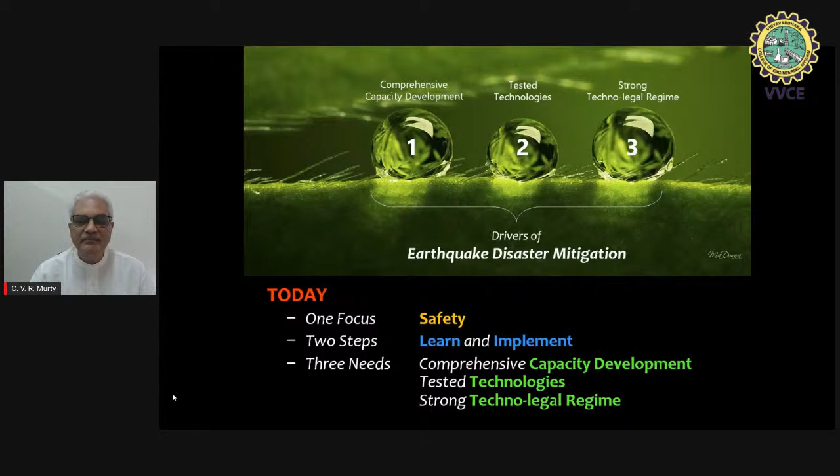So let's begin with the basics. We have a lot of activities before the event, and suddenly there is an event, and then we have a lot of activities after the event.

Clearly, before the event, normal expectation is that we can prevent the disaster. But earthquake is one disaster where prevention is rarely used as a word, and if used, it's in a very limited context - not to stop the earthquake, but to reduce the disaster. The key effort will be mitigation, which is making the built environment capable of resisting the strong earthquake shaking that is expected.

Preparedness is bringing people together and making them ready to face the eventuality of a strong earthquake shaking. But once the event has happened, after that we will need to do response. We will have to rehabilitate the people and also do some reconstruction for the lost built environment.

In this entire disaster management cycle, our focus is actually mitigation and preparedness. These two will require 80% of our effort. If we haven't put that in, it will swap with response, and we will have to do 80% response - but unfortunately we would have lost lives and a lot of property.

But if you want to reduce the post-earthquake effort, these are the two items we need to focus on, especially for earthquake disaster management.

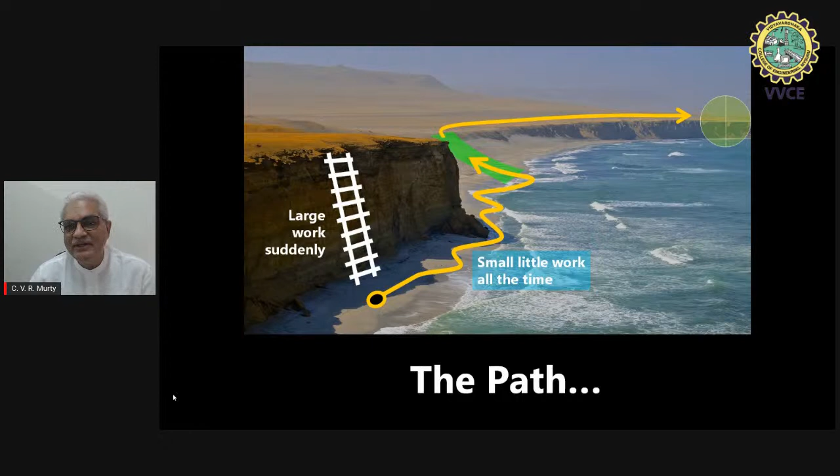In the second path, we notice we have to do small little work all the time without any rest. This is the entire picture I want to share: if you do response, rehabilitation, and reconstruction, you are putting ladders and reaching not the destination, but somewhere far away from it. So we haven't solved the problem if we just do response, rehabilitation, reconstruction.

If you do mitigation and preparedness, that is the only sustainable path for us to reach a state of being prepared to face earthquakes. This clarifies the disaster management cycle and the importance of these two elements, mitigation and preparedness.

We could have done a large amount of mitigation and preparedness and kept the earthquake disaster effect very local. But if we don't do our hard work, it will spread as a disaster of the state, of the nation, or even sometimes internationally.

What is very clear is that if we don't do any mitigation, then the game is over, and we are actually inviting a level 3 trouble for all of us, where we may even need international support. This is not the intent of disaster management in this country. We would like to ensure that an event in a local scenario does not become an international matter.

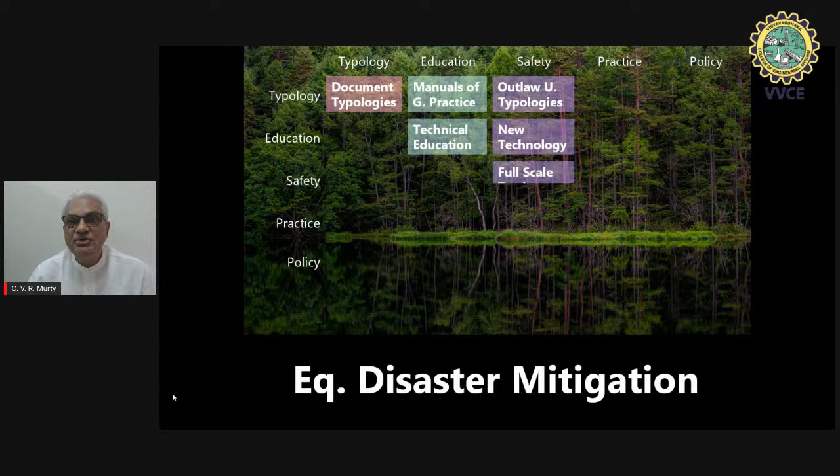We need to come up with new technologies and do full-scale testing, because earthquake is a nonlinear problem, so we can't do scale model testing. We need to develop skills in the artisans, do continuing education of professional engineers, undertake retrofit, and develop standards.

And finally, we need to change bylaws, license engineers, do peer review of all the structural safety designs submitted to municipal offices, assess risk regularly, and show that index to the people on the level of preparedness we are in, and eventually regulate all of it through a Structural Safety Act.

Now let's divide this work into the three groups we've identified, the trident, and that will be the division of primary responsibility. Even though each of the three groups will participate in all the elements, the primary responsibility lies here. The industry will take the safety and practice part, which is to do with the skills and implementation of skills and practice.

Government will take the policy part, which is to do with the attitude of the people. And academia will take the education and the typology and inventory part, which is to do with knowledge. So knowledge, skills, and attitude together are going to make this country a competent nation.

You can understand that in mitigation, it's not just one of these items. If you do only one, you haven't done enough. You have to do all of these items, and there is no sequence. You have to start off on all of them, and eventually it will improve.

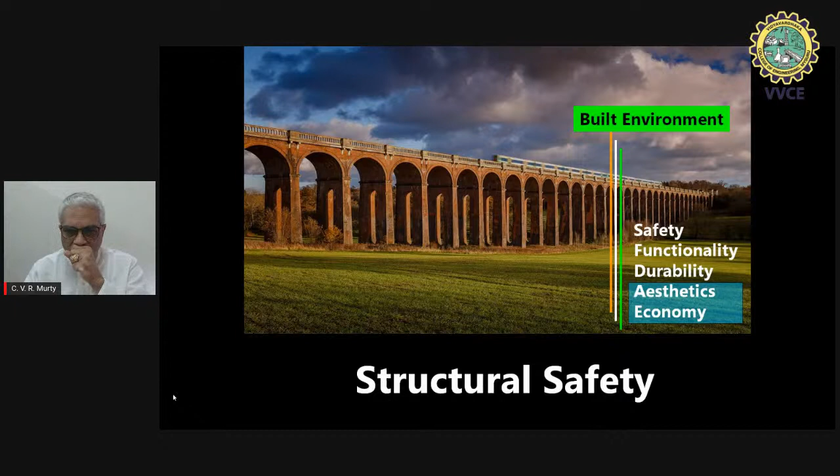So it's best to go on wisdom, and wisdom tells us many things. First, it says don't make known mistakes. So what are the items we have to make sure of? We need to make sure that the people, the manpower, is competent.

Second, the land use has to be based on past experiences and the projected risk at different places. For example, when a river is going to go into full spate and flood, why would you build in low-lying areas?

We need to pick materials carefully. It's very exciting today to use high-strength materials, but they are the most dangerous materials to use because they are engineered materials, and they are brittle. We don't do any experiments, and we go ahead using them without standards even permitting their use. So jumping the gun by the industry is not doing good to this nation, as we are conducting ourselves today.

Second, a large number of untested technologies are borrowed from international environments. They may be applicable to non-seismic countries but are being grafted into this country. This is another area we have to be extremely careful and wary about, simply borrowing technology from international environments. Compliance - I think we need a mechanism for ensuring compliance with the basic safety standards laid down in this country, whether they are being adopted or not.

So you would say, such a big task, how would you go about it?

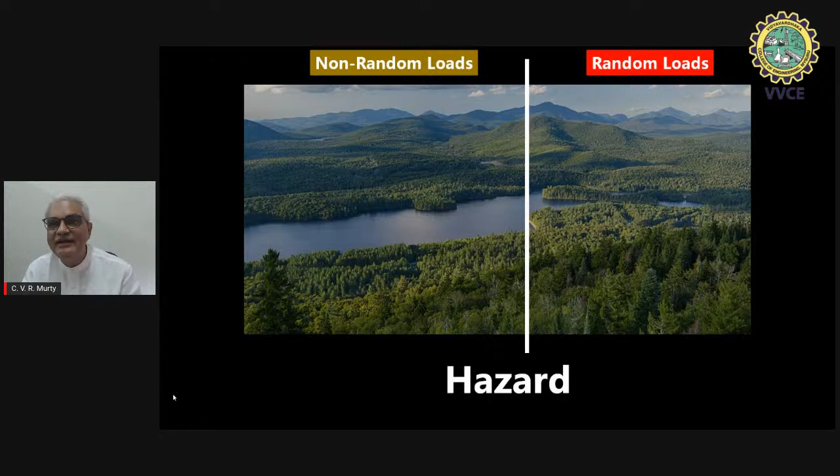If you look at hazard, we will take all the loads into random and non-random loads. I hope you know the list of random and non-random loads. On the left-hand side are the classical loads: dead, live, snow, and so on. On the right-hand side we have wind, blast, and earthquake.

The ones in green are displacement loading, or strain loading, and this is not taught in colleges, how to do structural analysis for this. In the normal context, it's not taught. Especially earthquake safety and earthquake analysis is something one learns by oneself without any formal support. And if you keep this as an elective for too long, people will have the illusion that they know the subject.

Now, when you look at these non-random loads, they follow a certain normal distribution. But when you look at the random loads, they follow a Poisson distribution. On the left-hand side, we say we want 95% of the cases where the load has to be less than this value, this is what we call characteristic load. On the right-hand side, we need to know what probability of exceedance should we take for that load level to be acceptable.

But as of today, in the standards, we call them design loads. They are considered values, but not characteristic values, because we have not clearly stated our agenda. Are we saying 95% of the cases? Then, are we taking the corresponding statistical analysis? This is where we need a lot of introspection and to relook at the way we are defining our loads.

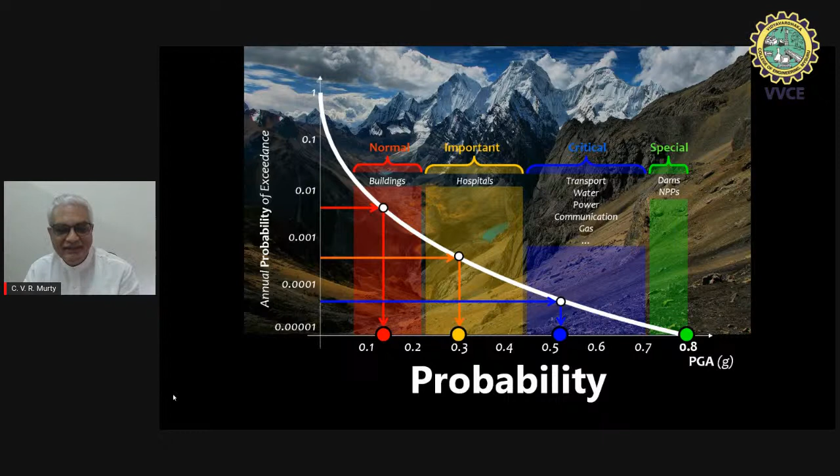Now, in this scenario, these are the numbers which are conceptually in place. But have we done such rigorous work? The answer is no, we haven't done this seriously to set exact values of probability for each of these items. That effort is to be done, and we need to do it urgently.

Another important aspect missed out in today's earthquake hazard assessment is that if you look at the Indian plate colliding with the Eurasian plate, there are plate boundaries at Andaman Nicobar, and some interplate boundary proximity in Kutch, Gujarat. But we are faced with our Himalayan arc, which has a special feature: during an earthquake, the plate moves out and comes back, a movement that is not straight but an opening and closing movement.

The impact of this in the fault parallel direction is shown as a pulse effect in the accelerogram, and in the perpendicular direction another pulse effect. In the velocity diagram, velocities up to 2 meters per second are already recorded in past earthquakes. Accelerations up to 3.2 G are recorded. Slips up to 700-800 mm, even 1 meter, are recorded at instrument locations. If you go onto the fault rupture zone itself, the numbers can go much higher, up to 3, 5, or 10 meters.

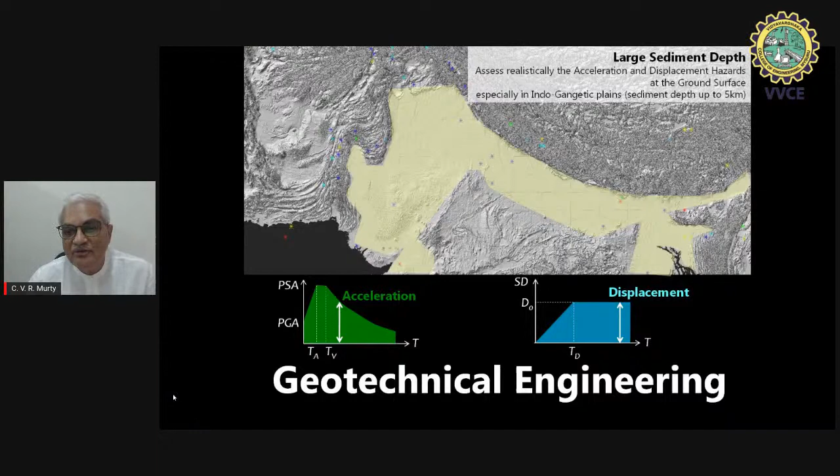We need a lot more organized hard work, because as the Indian plate collides with the Himalayas, the lesser, middle, and higher Himalayas are formed. As you go from Jabalpur to Kanpur to Lucknow to Gorakhpur and up to the hills, the depth of sediment varies from 0 to about 7-8 kilometers or even higher. In that scenario, the natural period of the site will go from half a second to about 7 seconds in the Himalayan wedge. Different structures with different natural periods will be picked up by the earthquake shaking, and we will see serious damage inflicted on them.

So clearly, we need regulations that are sensitive to the site effects likely at different locations, at river mouths in India, or lake beds that we are building on, and so on. We need to be very careful about land use development in the time ahead.

The word multi-hazard has come on suddenly, and it looks like a new monster. Answer is no, it's not a new monster. We've always been doing multi-hazard, just that it's fashionable to say it today. We have been handling wind, waves, earthquakes all together in the past. But somehow we never made noise about it.

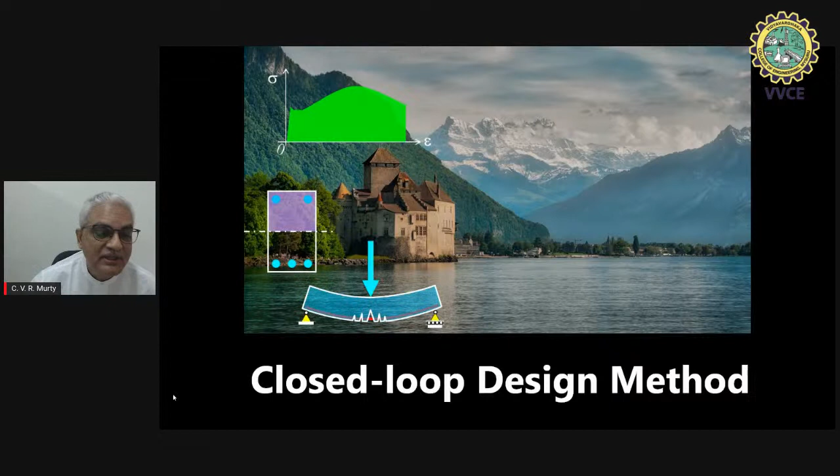This is B.Tech and M.Tech. And then you go to construction, you do detailing, and then you construct the structure. But what is actually required is that you need to know what structure you have designed, how it will behave, and what will be the damage that will be inflicted in it. So currently, in today's education process, we are only doing the forward loop, and we have not done the backward loop. Unless we do the backward loop, we don't know if the design that we have given to the people is safe or not. And this is where we need to give a holistic view to our students and teachers.

They need to understand that earthquake is not a force, it's a displacement, and we need to ensure that there's enough deformation capacity in the structure to resist the displacement that is imposed, and that earthquake doesn't apply forces. Forces are induced because of inertia. All this has to happen calmly, and it will take time. And there has to be priority to teach earthquake safety to the people of India.

There are 7 virtues of earthquake resistant structures. And if you believe this, the first virtue is that it has to be a simple configuration. Structure has to be simple in geometry and structural system and the use of non-structural elements. The second one is it must have an assured at least minimum stiffness, initial stiffness. It must have at least a minimum amount of lateral strength. It must have at least a reasonable ductility and a guaranteed deformability in the structure. And it should lead to a desirable collapse mechanism.

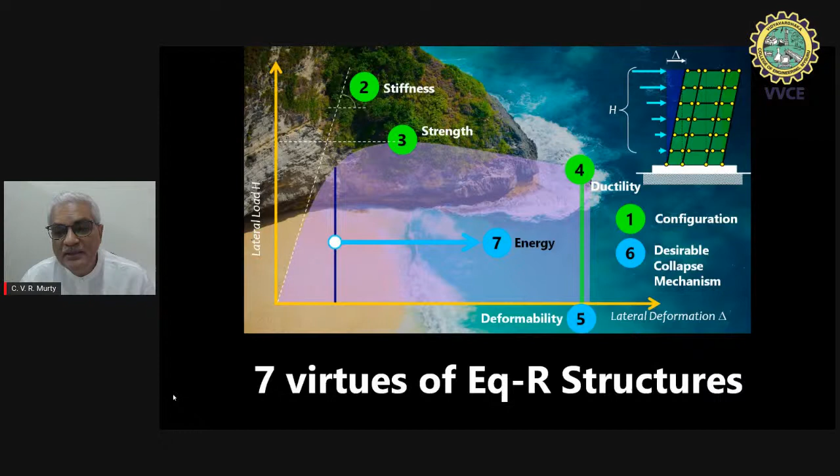But more importantly, we need to ensure that the energy that the earthquake is feeding is absorbed by the structure. And these are the 7 virtues that the structure has to now be capable of in the path of trying to resist earthquakes without collapse.

So what are the design methods? There are 4 levels of design methods. We started with stiffness-based design. We are currently in the strength-based design. We are poised to get deformation-based design in place, and we are a little away from the energy-based design method. The stiffness-based design is discontinued already. Currently in practice is strength-based design. Currently under development, where the focus is on collapse mechanisms and deformability. This is what is the hottest topic right now for research.

In time ahead, we will not only worry about collapse mechanisms and deformability, but we'll also talk about energy absorption in structures. We are at level 2 right now. We need to go to level 3 and level 4. Hopefully this will mean a lot of hard work for all of us, which we will do happily.

Let's understand vulnerability a little bit. Vulnerability is the incapability of the built environment to resist earthquake shaking. Let's take 3 examples: wind, flood, and earthquake, and 3 structures. In wind, a flood, and an earthquake, what happens? In the first, the wind is going to suck the structural components away up into the sky. In flood, it is going to topple the structure, and in earthquake, it's going to bring it down vertically.

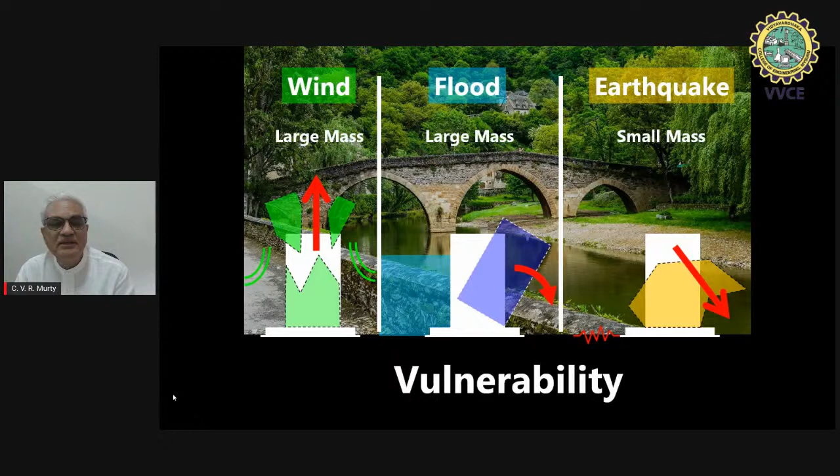Now, how does a designer do all of this? In the same location where there is wind and earthquake, how does a designer say what is large enough mass for wind, but small enough for earthquake? This is the magic that R&D has to solve. What is the optimal mass? What is the optimal design? What is the best design that can resist both of them?

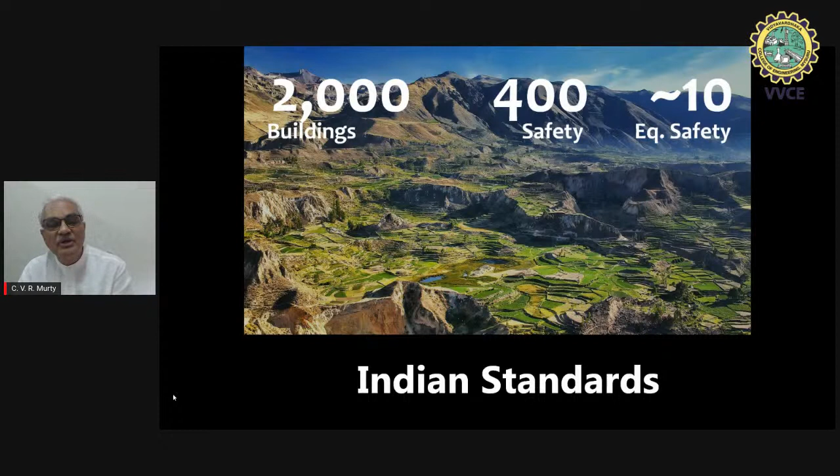In Indian standards, the picture is very clear. We have about 2,000 standards for buildings alone, and 400 are related to safety, and only about 10 of them are related to earthquake safety. In this 400, almost all items come into picture, but in the safety list, the 3 focus elements are estimating hazard and analysis, design and detailing, and assessment and retrofitting. This is where the 3 standards are focusing right now. But even there, it's largely related to buildings, and the other non-building structures, we need to develop those components.

A new habit has to begin, that draft standards are prepared by practicing professionals and proactively brought to the Bureau of Indian Standards, so that these clauses can be included based on the considerations they are experiencing during practice. Of course, we need to increase the number of academics and professionals engaged in the development of standards.

So what is the status today on the same 3 elements of nature? Wind is seasonal, flood is annual, earthquake is rare. So how are we behaving? We are addressing wind to some extent, but flood we are disrespecting - we are constructing in low-lying areas. And earthquake, we are not fearing, and we go on despite past experiences.

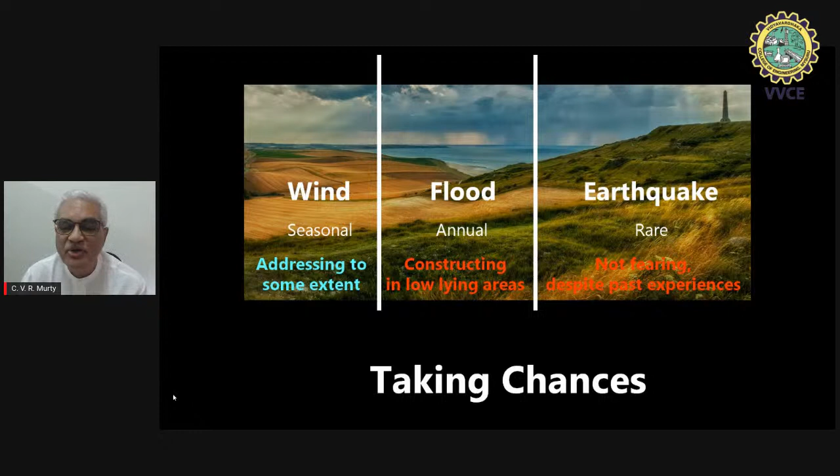In 2001, we lost 13,805 people, and we lost a huge amount of infrastructure and heritage property. But have we really taken action forward from 2001 onwards? So what are the gap areas?

When you look at earthquake safety versus wind: in wind, the behavior is supposed to be elastic, fair enough. But in earthquake, the behavior is supposed to be inelastic. The force loading of wind has an upper limit that can be determined deterministically, and there is sufficient data for that - you can go with a value and be happy about it. But when it comes to earthquake, the loading is displacement, and this upper limit is not determinable deterministically. We have to go probabilistically, and we have insufficient data even to do a probabilistic estimate. So we are in trouble. We have a shortage of knowledge here.

As you can see, nonlinear behavior of the structure during earthquakes is not taught - nonlinear analysis is not taught in colleges as mandatory curriculum. So how do you expect engineers to know nonlinear analysis? They will take the computer software, press any button, and be happy about it, and make others happy about it too. Very good. But what is the truth? Only time will tell.

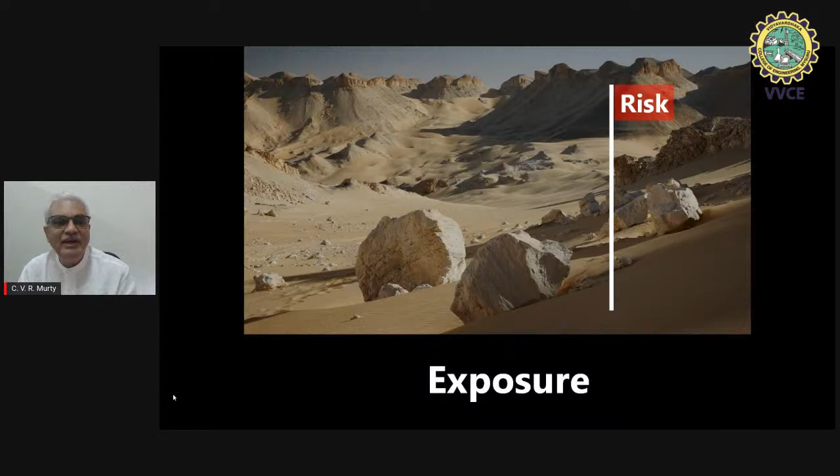Exposure. If you want to see the risk assessment, there is a strong need to understand how much exposure we are providing to the earthquake, of the people, property, downtime, and business continuity. For example, in this picture, in the middle of the desert, if you have an earthquake, no sweat, there is no exposure, zero. But if you add buildings and structures here, then you're putting people, property, you're worried about downtime and business continuity. And according to this, there'll be human risk, property risk, financial risk, and business risk.

And the way to control all of this is bylaws. So bylaws should be written a lot more carefully with a holistic picture in mind as to how much risk we are putting our people into, right? Because exposure is one of the important components of risk. And if you indiscriminately keep increasing FSI in buildings and structures, you can actually harm people's lives by unduly putting a large amount of people in structures that are actually vulnerable to earthquake shaking.

So talking about risk, the three components of risk are hazard, vulnerability, and exposure. Hazard is controlled by science, vulnerability is controlled by structural engineering and geotechnical engineering, and exposure is controlled by bylaws. This together is our game of earthquake risk, and we need to be very, very careful.

So today's situation is that under the probable likely events, the shaking, the impact has been such that we are seeing extreme risk under intensity 7 shaking. 220 kilometers away in Ahmedabad, when the 2001 earthquake came, intensity of shaking was 7, but we had 132 multi-story buildings collapse. That's not the scenario we want.

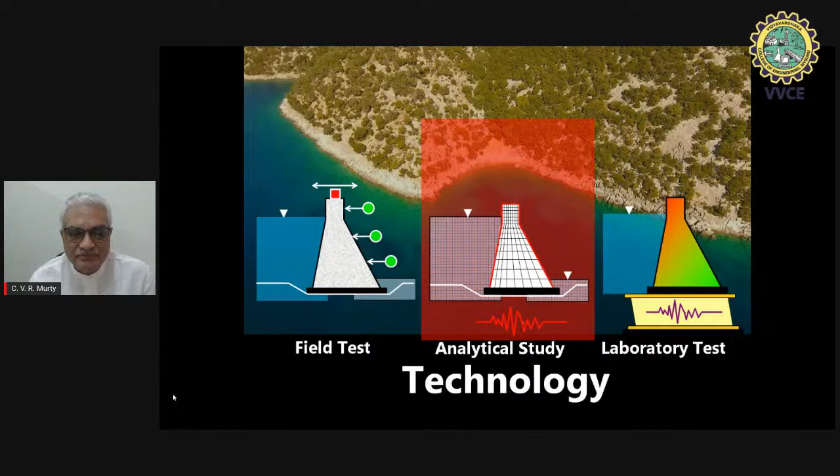Now, if I take just the analytical part alone, we are doing the equivalent static method, but there is response spectrum method, pseudo-dynamic method, and dynamic method. We're not doing the right-hand side three items. We're only doing the equivalent static method, which is a 1960s item, right? There are 3,500 major dams in the country, and if you're still striking 2 stones to assess their safety, I think we are not doing justice to the people of India.

We need to buck up and make sure we implement the correct level of technology when each of these tasks are given. This is one example I'm giving you of dams, but there are many other examples that we can dwell on and understand the current status.

Coming to retrofit, we need to have very committed individuals who can actually say, I want to do retrofit, and they keep pushing different groups and organizations, including governmental structures, where retrofit has to be done. Very nice. But more importantly, we need to make sure that while safe new structures are going to increase, we have to make sure that the unsafety in existing structures has to be reduced, and this can happen only through retrofitting.

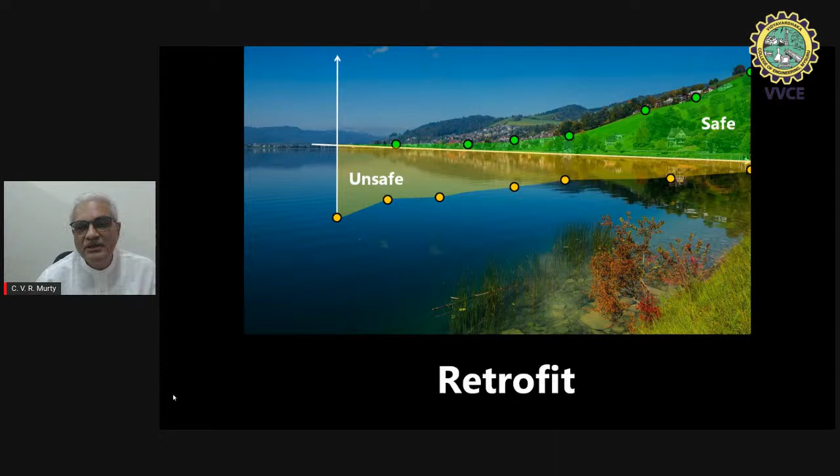And retrofitting is a slow process, a tedious process. It's not going to be as fast as making newer structures safe, but it requires a higher level of engineering, and we need technologies for retrofitting.

As of now, there are a lot of people who say that if you can do component-level retrofit, you will be able to save the structure by either jacketing or wrapping and so on. But the key issue is the holistic parameters, like the lateral stiffness of the whole structure, lateral strength of the whole structure, lateral deformability of the whole structure. These are the questions we have to answer, and simply wrapping one column will not alter any of the global parameters of the structure.

So there's a large inventory of critical structures, lifeline structures, schools, and houses that we need to retrofit, and we don't have hands for that across the country. So we need a lot more energy to come up on that.

To assess existing structures, we need methods, and we have 4 levels: rapid qualitative, detailed qualitative, simple quantitative, and detailed quantitative. There is an illusion that the first level assesses safety. No, it's not—it's only to screen. Safety is assessed only by quantitative methods, which are level 3 and level 4. Level 1 and 2 only give you screening procedures. They don't tell you whether the structure is safe or not. They only say that prima facie it doesn't have the required features.

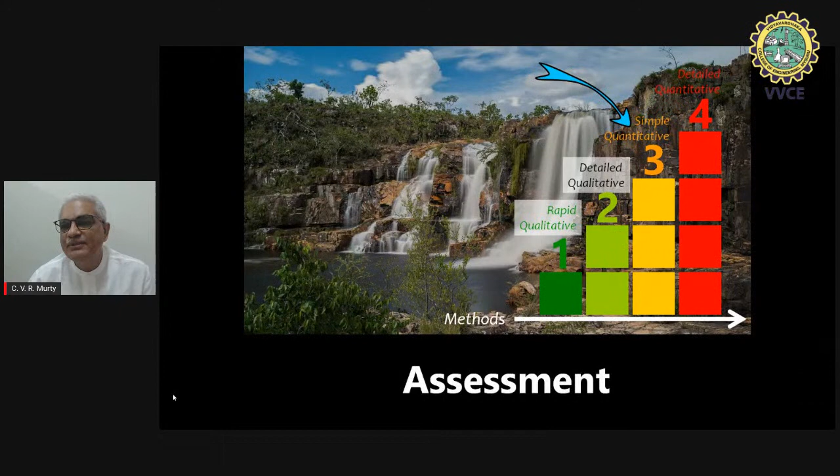The level of unsafety can be assured only through quantitative measures. I would urge that we start at level 3 urgently to get people to understand what retrofitting is. What's important is that the rigor required for level 1 is lesser, level 2 is a bit more, level 3 is further, and level 4 is even higher. More importantly, the time taken for levels 1, 2, 3 and 4 are very different—level 4 requires a large amount of time. So when you do level 1 through 4, there has to be a strategy.

The strategy is: if you take 1,000 buildings at level 1, 100 of them will be taken to level 2, saying they need to be retrofitted. Out of that, 10 will be taken to level 3, saying they need to be retrofitted. And out of that, 1 will be taken for retrofit at level 4.

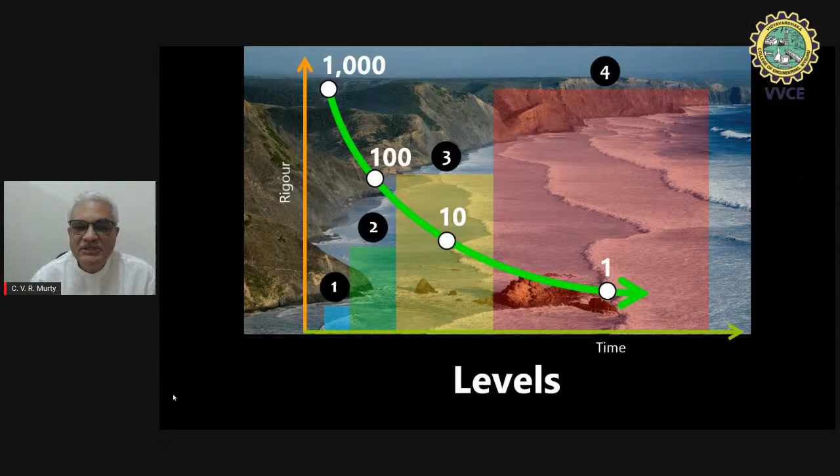If you look at the 33 crore houses we have in the country, 80% are sitting in seismic areas, which is like 25 crores. If you start doing work on them, even if you take just 1% of that, that means 25 lakh houses. Obviously, 25 lakh will become 2.5 lakh, will become 25,000, will become 2,500. To fix 2,500 structures, do we have enough people in India? That is the question we need to answer urgently, so that the work of earthquake retrofitting can begin.

You should understand that there is retrofitting, rehabilitation, and repair. In retrofitting, structural capacity is being altered. In rehabilitation, functional use is being altered. And in repair, visual improvement is being altered. Structural capacity can be restored to original condition, upgraded to a higher level, or the structure can even be remodeled. But one lesson learned very clearly is: repair is not retrofit.

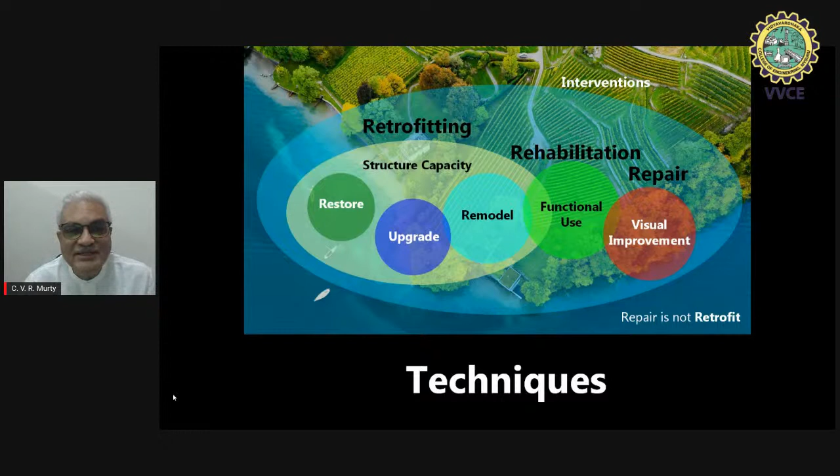So anybody who is selling repair in the name of retrofit, you better be careful. This is another market that has grown aggressively, and for want of people who understand the subject, they are getting away with anything they are selling. The process of retrofit is simple—there are set procedures for that, and it's hard work. The process is simple, but hard work it is. That's all. So the bottom line for new structures is clear.

If you want to reduce earthquake disasters, new structures should have peer review of their designs, and technologies should be proposed with R&D backing. Type designs should be done only if they are fully tested on full-scale structures. In fact, we have only 2 facilities in the country today that can do full-scale testing of 3-story houses or even a 15-meter long bridge. We don't have more than that. So for 132 crore people, 2 facilities is too small.

Another issue for us is existing structures—we need to assess them. We need nonlinear analysis skills. We need to learn strengthening and the retrofit measures that have to be undertaken. And we have to start with pilot projects—we can't go whole hog. You have to nibble the mountain, not gobble the mountain.

And bottom line, to do all of this requires competent engineers. We need to make sound appointments, and we need to train graduate engineers, continuing education, but bottom line is licensing of engineers. If engineers don't pass an exam regularly—every 2 years, 3 years, 5 years, whatever—then you're saying we don't have safe hands.

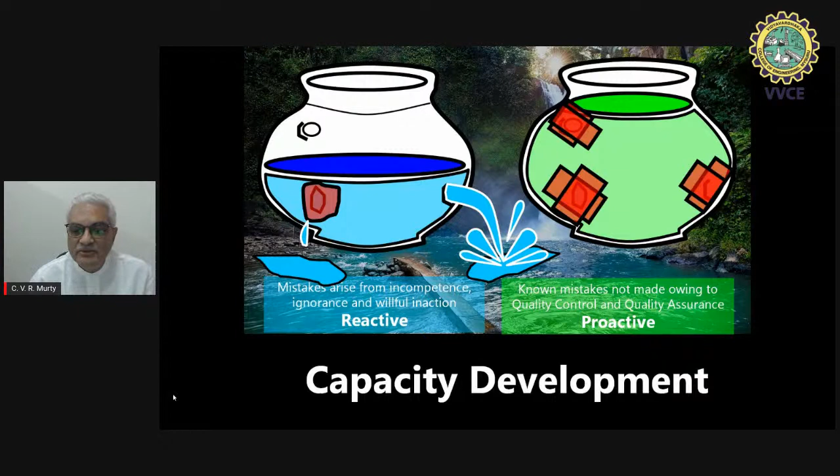So, licensing of engineers: if India has to become robust and capable of doing earthquake resilient constructions, then we need teachers and structural designers who understand the subject completely. We need not just degree holders. Degree holders will write examinations and get a license if they pass, and after every 3 years or so, we need to have that agenda. Otherwise, we will not be able to guarantee safety.

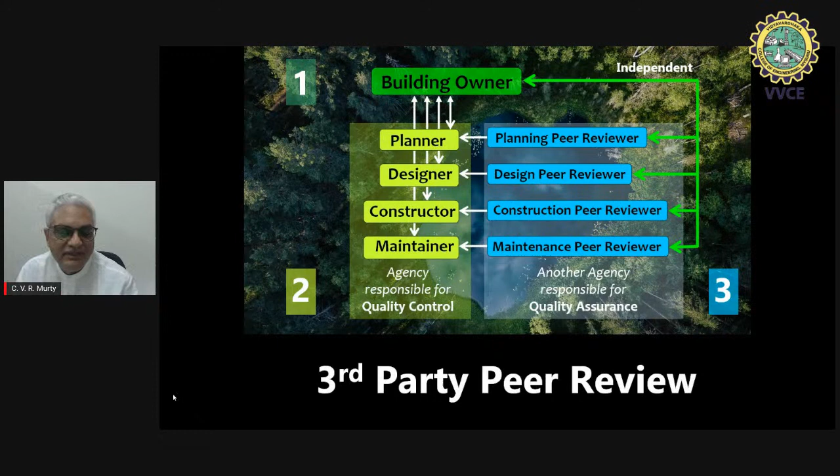So we need another independent group called the quality assurance group. This group will report directly to the building owner, and that is where the game begins. It's an independent group, and they will feed back to the owner what the truth is. So the owner becomes the first party, quality control becomes the second party, and quality assurance is the third party. That's why we need third-party peer review of all structural designs when it comes to earthquake safety.

So we make a lot of mistakes in life. Yes, let's understand our mistakes. I want to do something - do I know what has to be done? Answer is yes. Then am I trying to follow that? Answer is no - that's the error of intention I'm getting into; I know what has to be done, but I'm not doing it. If I know what I'm trying to do, then am I succeeding? If the answer is no, then that is error of execution. If I am succeeding, then it's successful completion of the task. Very nice.

Let's go to the other side. Do I know what has to be done? No. Do I recognize that I don't know? If I don't recognize it, that's error of concept. If I recognize that I don't know, am I trying to do something about it? If I'm not, that's error of intention. And if I am doing something about it, am I succeeding? If it's no, then I have to go back and recognize that I don't know what I'm doing. If I'm succeeding, I move to the positive side.

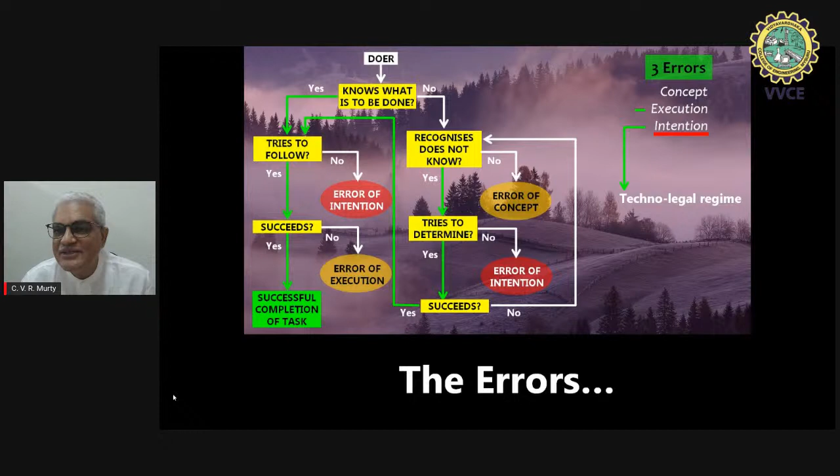Error of intention is the most dangerous of all. You will not come out of it in a court of law if you are shown to have error of intention. This can be corrected only through a techno-legal regime. Error of execution can be corrected through licensing of engineers, and error of concept can be corrected through capacity development.

And that is where we stand today, that if India has to become robust, we need these three ingredients of earthquake disaster mitigation, these three bottom lines of earthquake disaster mitigation.

Complacence is coming into us in many cases, that we know everything and are doing everything right, and that is because we are hurting in attitude. We don't have positive attitude, we have negative attitude, and that is where we are actually getting into trouble. If we can correct our attitude to become positive, only then will we be a competent nation.

You can have any amount of skill and knowledge, but if your attitude is negative, then you are not competent. You are incompetent, even though you have skills and knowledge. The nation is not getting the best out of you, not benefiting from your knowledge or skill, because your attitude is not proactive and positive for the good of others. So very clearly, we need to ask for competence: attitude positive, skill, knowledge, and then only you'll be able to get to competence.

Now all of this will begin with the teachers, and the teachers are at 5 levels. I talked about competence being in 5 cycles from childhood to retirement. The first set of teachers are parents. Second is school. Third is college. Fourth is employment. And fifth is yourself.

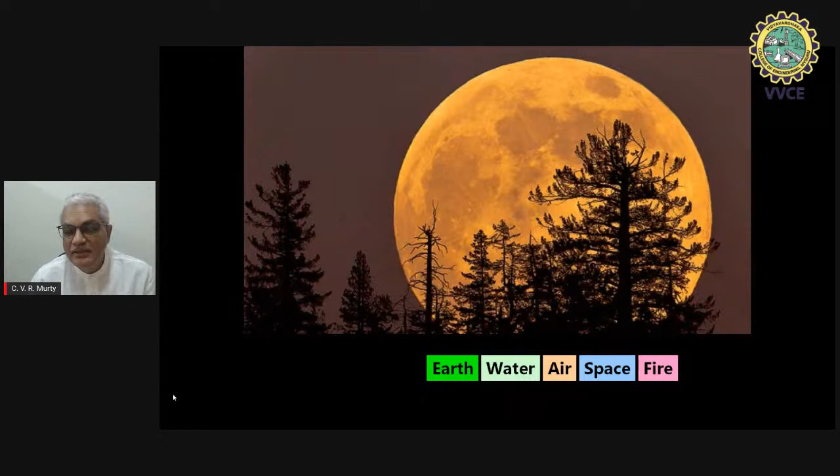Very clearly, nature is going to throw 5 salvos at us, and nature is also watching us. But what is interesting is that we have become paper tigers. By doing paperwork, we don't make structures safe. We need to get the big picture right of the demand as well as the capacity. Only when you get the demand on the structure and the capacity of the structure in place, can you make meaningful contribution to earthquake disaster mitigation.

In the next 30 years, India is going to grow. If we don't change our strategies, we will be 180 crore people from 132 today. But if we are very active, we can become 200 crores. If super active, we can become 250 crores. These are the projected limits of the potential population growth.

So we need to be very careful that the built environment required for so many people has to be created. At least the additional built environment we create has to be made disaster resilient, earthquake resilient. That is where the challenge is - this explosion of infrastructure development and housing is happening. But if we don't correct the method now, we will have more unsafe structures in front of us.

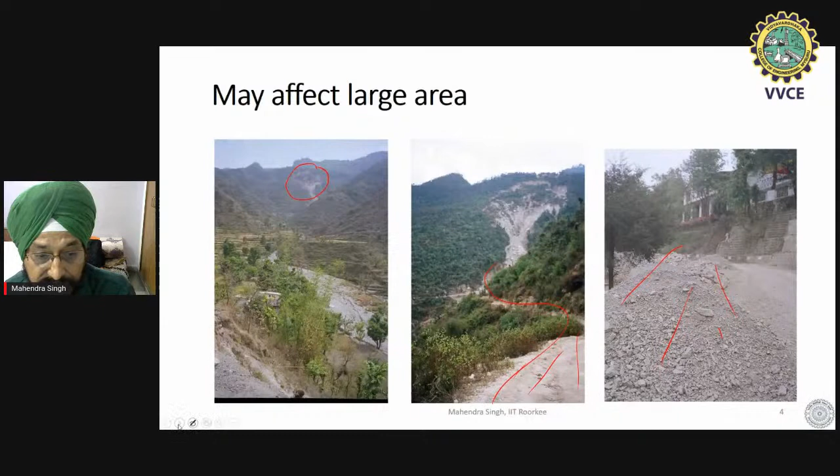I have shown here one of the landslides in our state. You can see it started from here, and you can see how much area it is affecting. This is a very important issue, especially for the hilly regions, and I'm focusing on the rocks.

In geotechnical engineering, failure mechanism is very important - I believe it's important in all branches, all disciplines of civil engineering. When we talk about mechanics, we need inputs from soil mechanics and from rock mechanics. Soil mechanics is very well developed, but as far as rock mechanics is concerned, we are still in a developing stage. Soil can be considered isotropic, homogeneous, and even a continuum.

In general, in many cases, we assume a circular failure surface when talking of slope stability analysis, etc. But when it comes to rocks, they are not so simple. Generally we feel that whenever you get rock, you don't have to worry about it, but it's not so. Rock is very complex in the sense that it has fractures, which we call planes of weakness.

If you look at this photograph, you can see these fractures here, and they make the mass very heterogeneous. I'm using the term discontinuum - it's not a continuum as it is, it becomes a discontinuum, and then the failure mechanism becomes very complex. These are the fracture planes - if you look at this photograph where I'm showing this line, these fracture planes are going to govern the mechanism. The rock mass can slide along these fracture planes, and they govern the failure mechanism. This is one aspect we have to appreciate when dealing with rock.

Let us come to the mechanism of slope failure. Before going to that, I'll be using some terms in my lecture, so let us be familiar with those terms. The first term I'll be using is intact rock. When I say intact rock, I mean the material between the fractures - it is the unfractured block which is between the discontinuities.

Say, for example, if I take this drill core, then this material, this substance, I'm going to call intact rock. This is going to have very high strength, very high modulus of deformation. If I talk about the jointed rock, it will not have that much high strength or modulus values - those values will be quite low. So the first term is intact rock.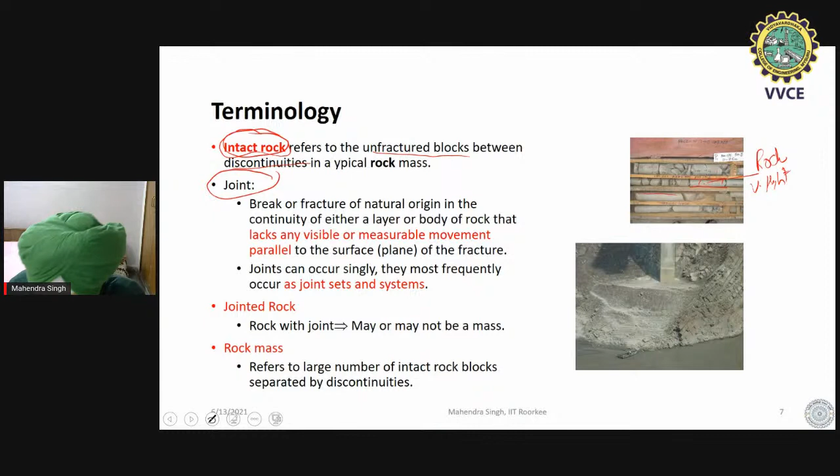The second term which I'll be using is joint. A joint is nothing but a fracture. We commonly use the term joint, though in joint, when you talk about steel structures it's something else, where two members are joined together.

Here it is opposite, where the rock is broken, we call it a joint. In the photograph on the right hand side, you can see a boat, and in the boat one person also, showing the magnitude of these fractures and the blocks. These are intact blocks, and these are the fractures.

The break of the joints are fractures of natural origin, and in the field there may be very small movement along these fractures before you construct a foundation or any structure over there. So this is another term which I am going to use.

The third term is jointed rock. Jointed rock means any rock which has a joint. For example, this particular core is a jointed rock, but it is not mass. So finally, I'm using the term rock mass.

Rock mass means there are a large number of intact rock blocks which are separated by discontinuities. Discontinuity is another term we use commonly for all these breaks in the continuity of the material. It can be a bedding plane, a foliation, or a joint also. So in this photograph, you can see it is a rock mass, and here it is jointed rock. These are the terms we will be using frequently: joint and jointed mass.

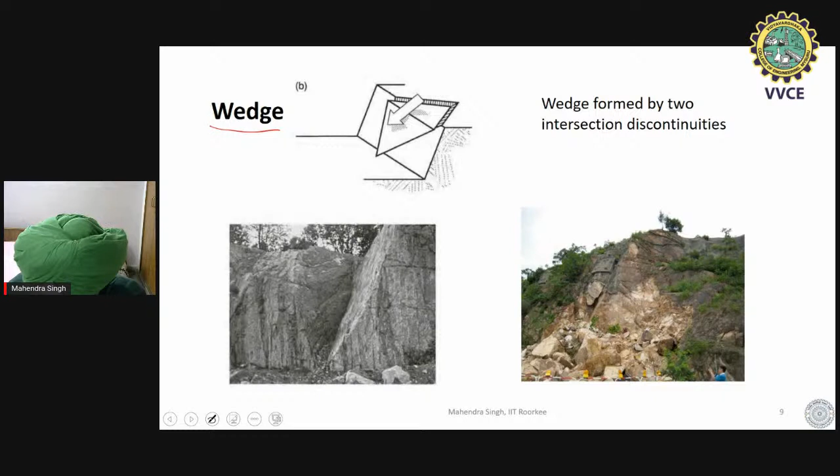Secondly, what can happen is what we call wedge failure. Wedge means now there are two joint planes. One joint plane is like this, another is like this, and as you know from mathematics, when there are two joint planes, they intersect on a line, the line of intersection. So this entire wedge can slide down. In fact, if the angle between these two joint planes becomes 180 degrees, it becomes a planar failure. So planar failure is a special case of wedge failure.

I have shown it in this diagram also. So there's the wedge, and it is trying to slide over these planes. It can be in touch with both planes, or only one plane, with detachment from the other, and so on. This wedge will try to slide down. Here also, the second figure shows some wedges which are trying to slide down. That is the second mode of failure.

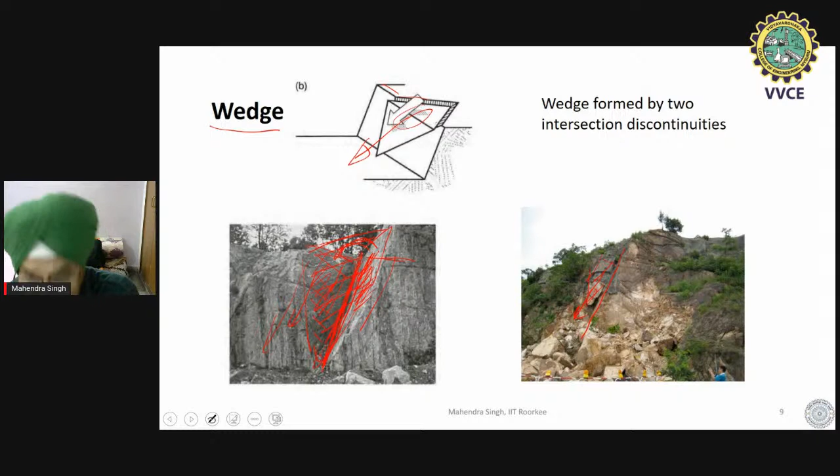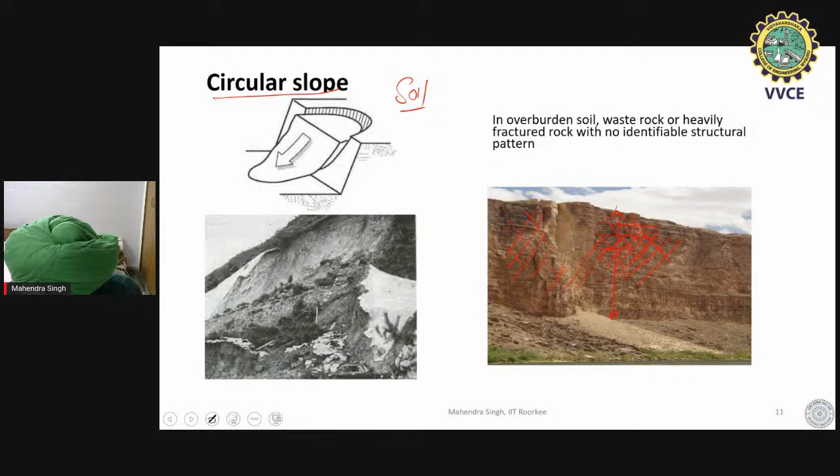Coming to the next one, we call it circular failure. It is the same as you have studied in soil slopes, so I'm not going to talk much about this. What happens is, if there are a very large number of fractures and the spacing is not that large, ultimately it becomes a slope like soil, because it's a very large slope, so scale is also very important. Block size is small, and the fractures, none of them have a dominating behavior, so you can say it is just like soil. We can use soil mechanics theories, and generally we use them for this highly fractured isotropic condition, where we should be able to see isotropic behavior.

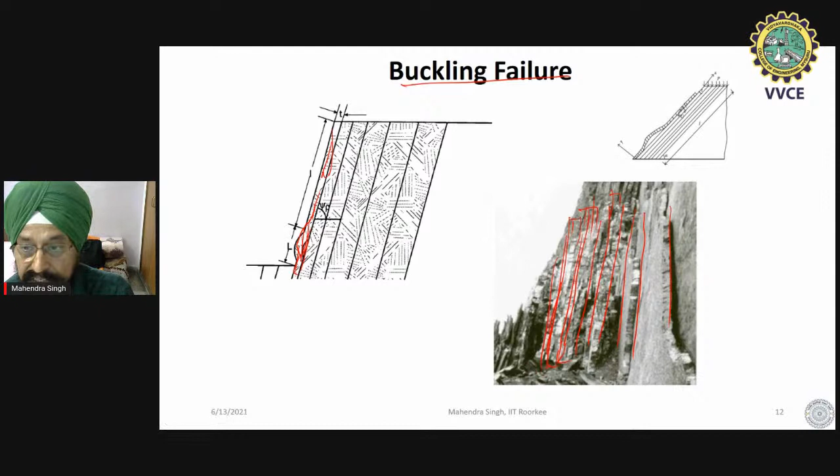One more possibility happens when you have very steeply inclined fractures, and they convert the rock into slender columns. This becomes a problem of mechanics, in the sense that flexural buckling failure can occur. Depending on the weight of this column, it can break depending on its modulus of rigidity, etc. Those theories are already known to you. So this is another possibility when there are steeply inclined joint planes.

Coming to the mechanism now, there are two possibilities, as I told you: sliding possibility and toppling possibility. Flexure I am not touching much here, because it needs the mechanics you have studied in strength of materials like subjects. The mechanics of these phenomena is very simple, it's a simple thing which we have studied.

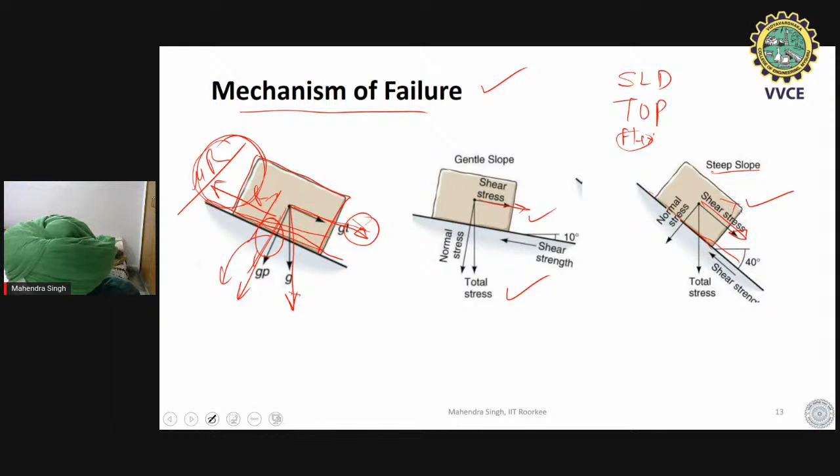So what happens if it is a gentle slope? Then this maximum limiting value of resistance will be quite large as compared to the destabilizing force, and this will be stable. Whereas if it is a steep slope, steep block or steep ground plane, then the shearing tangential forces will be quite large, and it is going to slide. This is the simple mechanics which we will be using with some modifications.

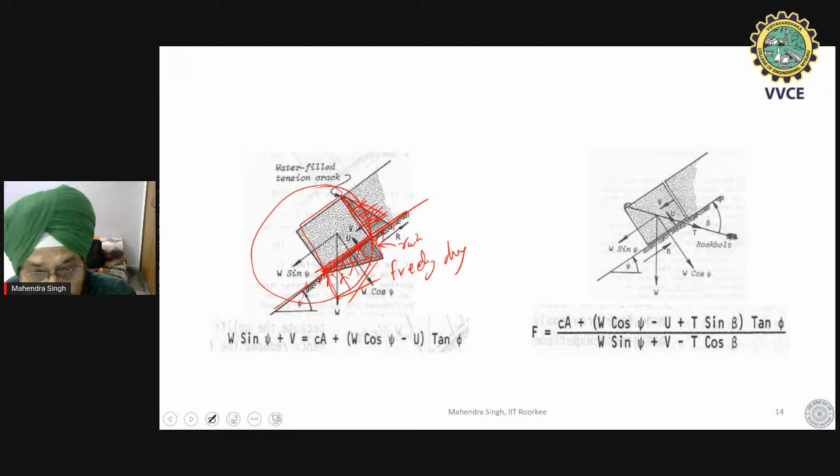So we can consider the equilibrium of this body, and then find out the factor of safety. Basically, factor of safety is how much force is available resisting the sliding, divided by how much force is trying to destabilize it. We can resolve all the forces, the weight in this direction and in this direction, the water pressure acting on this surface, take their components, and then calculate the factor of safety. This is the basic mechanism.

If you have a rock bolt, some tension cable, or you have bolted here, it is reinforced, we can do the mechanical analysis for this force too. T is the force applied by the anchor. I can resolve it into this direction and this direction. It is going to increase the normal reaction, which you add in the numerator in the strength, and the component parallel to the surface is going to decrease. So these kinds of analyses we can do. The mechanics, the mathematics, is very simple.

I was saying that for toppling, we have to consider the geometry. Geometry is very important. So if there is a block kept on an inclined surface, and it is having some dimensions, let us say delta x and y.

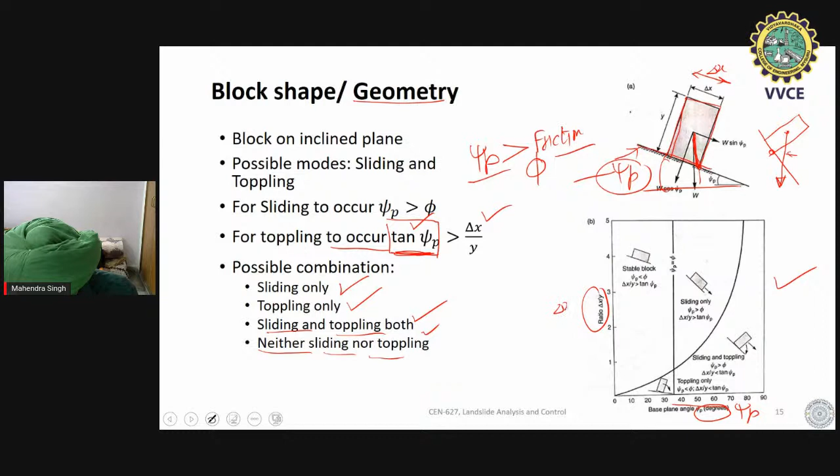And this curve is the tan of this angle. So for a particular case, if tan psi p is more than delta x upon y, toppling is going to occur, and the points will be lying on this side. So this gives us the boundary of the toppling, whether toppling is going to occur or not.

Similarly, if I draw a line here which shows the phi value, let us say phi equal to 35, this gives the boundary. So I can decide, depending on the block size, whether it is a stable block, or there is sliding only, or sliding and toppling, or toppling only. We can work out all these combinations from this simple diagram or mechanics.

Now when I was talking about the angles, when you go to the field, there are joint planes, and we have to have a sort of presentation of these joint angles, in which direction it is dipping. That is one very important thing, direction of dipping, and also what is the angle at which this plane is dipping, the surface is dipping. So angle of plane with horizontal.

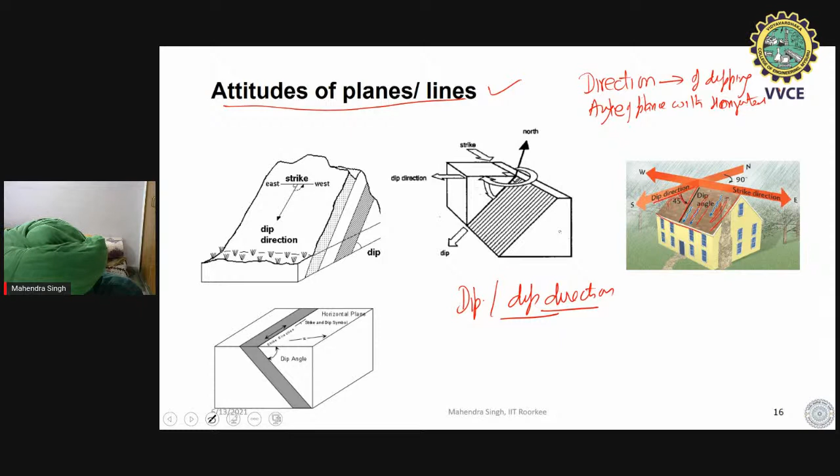So there are a few more terms coming into picture now. I'll be using the terms dip and dip direction. Dip means, I've given an example here, this is the roof, and the angle of this roof with the horizontal is called the dip. So this is the dip.

So in the joint plane, dip is shown here, and dip direction means in which direction it is going, whether towards north, south, east or west, that is called dip direction. Dip direction will be measured in the plan like this, and dip will be measured in a vertical plane like this. These two things are very important, because sliding can take place if both the plane and slope face are going in the same direction or not.

So we use what is called stereographic projection for representing the dip and dip directions. Stereographic projection is used for 3D orientation, with data presented in 2D. So what we do is like your orthographic projection where you have a horizontal plane and vertical plane.

Here we have an imaginary hemisphere, and we assume every plane is passing through the center of this hemisphere. This is the plane passing through the center, and we are talking about the angles only - we are going to plot the angles, not the distances. There are many systems, but we generally use what is called equal area projection.

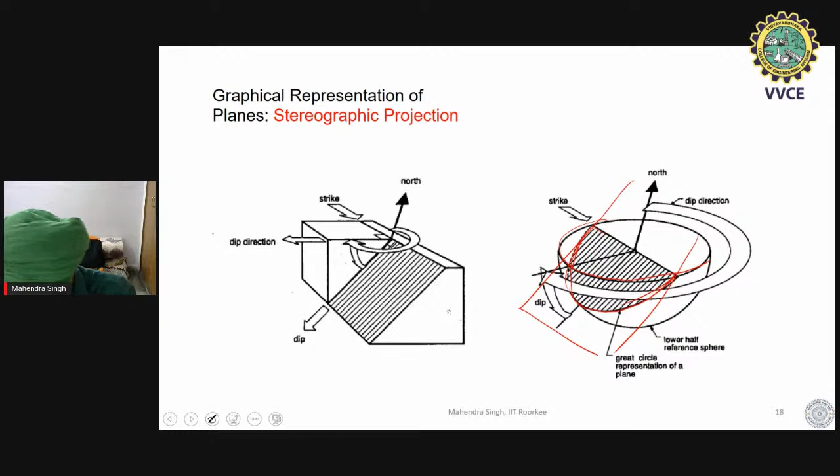So here is the hemisphere, and this is the plane. I take the intersection of the plane with the hemisphere, and then project it on the ground. If there is a point here, we rotate it like this, so every point goes onto the horizontal plane. When I rotate and bring it over, on the horizontal plane you get this kind of projection. So this circle is going to represent the dip and dip direction.

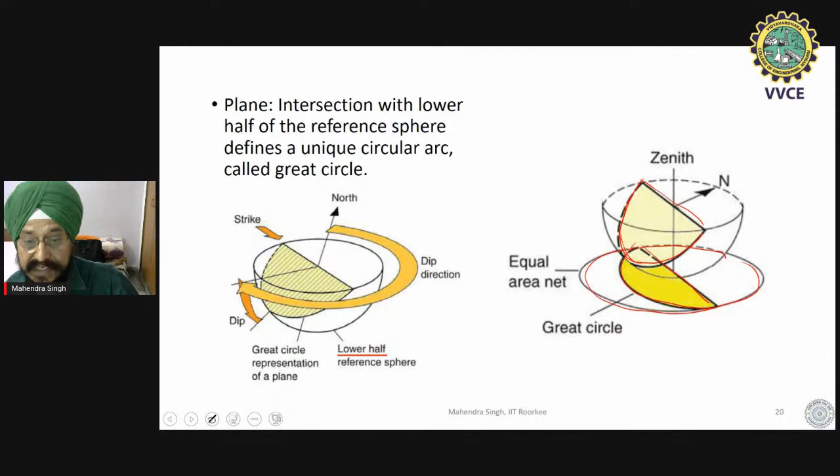So here again I have shown the same thing. This is the intersection, and this circle is projected over the horizontal surface, and this now is going to represent what is called stereographic projection. Finally you are going to have this kind of figure.

So say, for example, this is a plane, and this plane is going in this direction. You can imagine that the plane is having this much angle with the north - that is its dip direction. And this amount here is going to be the angle of the plane with the horizontal - this represents its dip.

Let me try to give you much more feeling about this. What we do is plot these stereographic projections using this equal area net, and I'm trying to run that one. Let me try to have a small video - is it visible?

There is a pin, put it here at the center. This is the way we are going to plot these stereographic projections. Now I click the drawing - it is a sheet, place it over here. Madam, can you respond - is it visible?

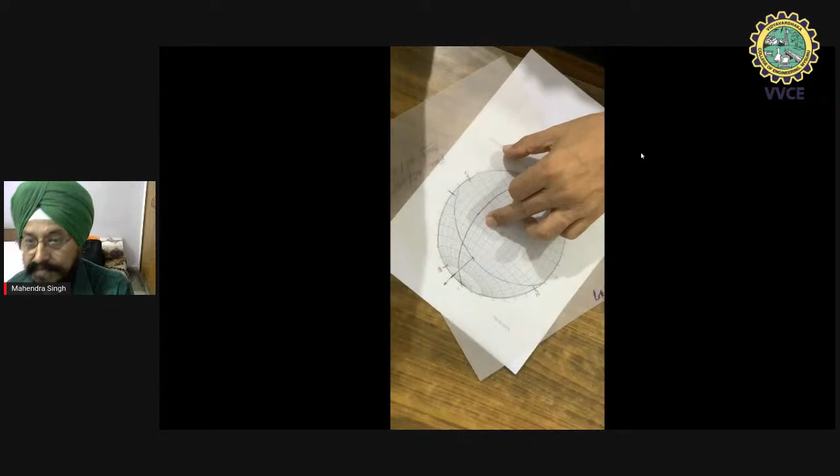So I bring north back to north. This is plane 2, this was plane 1, and here is the line of intersection. You can find out what direction this line of intersection is going - that is called the trend. So this is the trend, and this angle is the plunge.

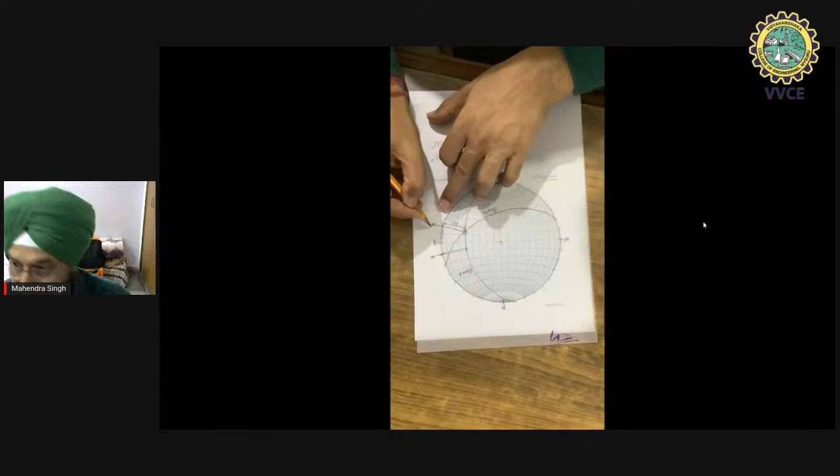So this angle is 10, 20, 30, around 38 degrees - this is the angle at which this line is inclined with horizontal. And I can read now that it is trending at about 106 degrees. Is it visible now? Yes sir, yes sir, it's visible.

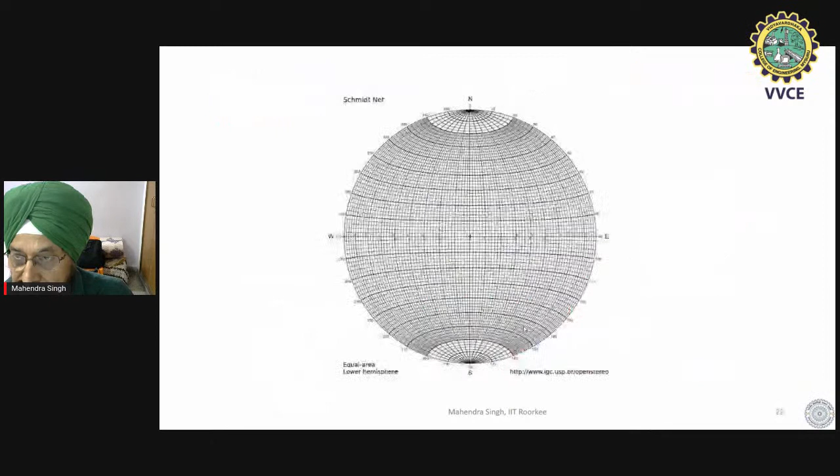So friends, I have shown how we can use this stereo net, and it gives us the idea that if a plane is represented here - this is north, south, east, west - and if you have a diagram like this, that means it is going in this direction from north by this much angle, and this value on a non-linear scale gives the angle this plane makes with the horizontal. So that is what we have discussed.

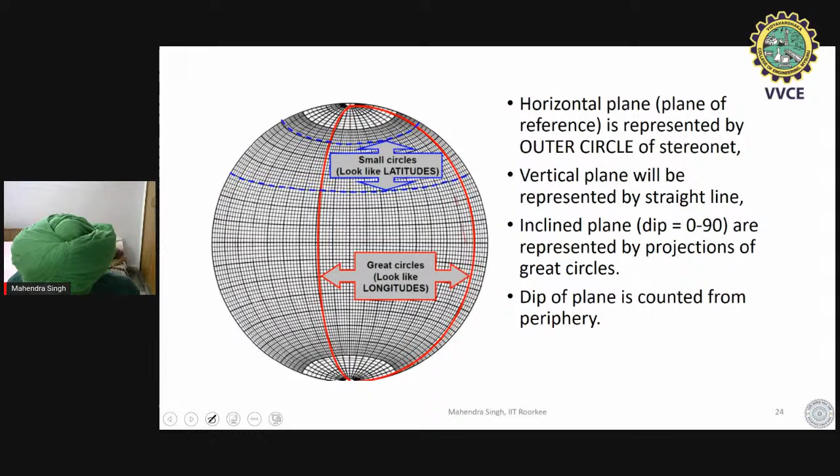I have also shown that if there is another plane here, I can find the intersection. The intersection of two planes is a line, and you can find out in which direction this line is going - it is very important - and what angle this line makes with the horizontal plane. There are great circles, and using these great circles you can plot the stereo net, the stereograph, and then find their point of intersection.

This is the plane, and sometimes we also need the normal to the plane. The normal goes in the exact opposite direction. If the plane is dipping in this direction, the normal will go in this direction, coming somewhere here. This is the angle of the plane with the horizontal, and this is the angle of the pole. Pole means normal, and it will be equal to 90 minus the dip angle of the plane, since the difference has to be 90 minus dip. So you can plot the point, the pole being the normal to the plane.

Now I come to the application part. How do we decide what kind of failure is possible? This is called kinematic analysis. Here I have shown the great circle of a slope face, and I have also shown another circle taken in exactly the same direction, which is the joint plane. So if I look at this, it is something like this: this is the joint plane, and this is the slope face.

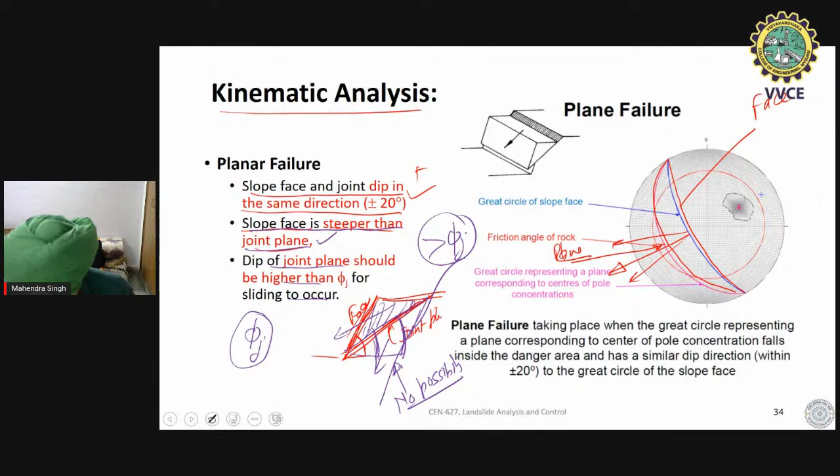The third and very important condition is that if you know the friction angle of the joint plane, phi j, then this angle of the joint plane should be steeper than phi j. If the joint plane is steeper than phi j, then there will be a possibility of sliding. Sliding is going to occur, it acts like a body. So this is the condition for sliding to occur, and this is how we decide based on kinematic analysis.

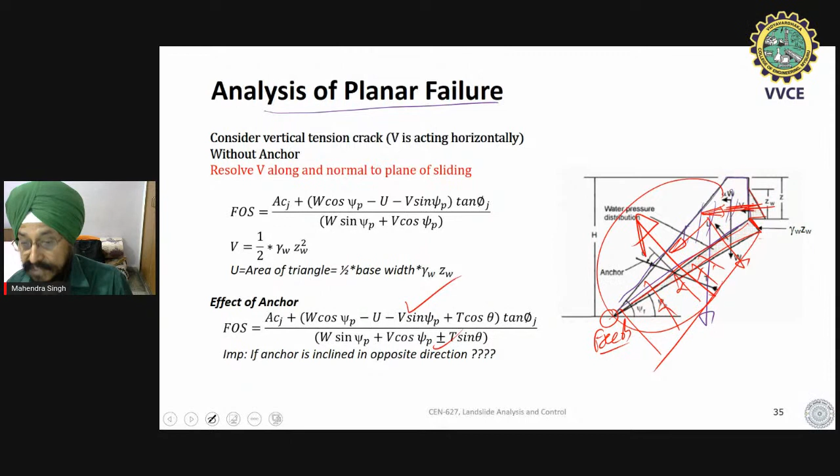Then to do the analysis, we take this body and find out its weight. Weight acts in the downward direction, and we can find its component normal and parallel to the joint plane. Similarly, if there is water pressure, we can resolve it and find the water pressure acting in this direction. From here to here, the water pressure will reduce if it is freely draining; if not, it may increase like this. You take this area, it acts in this direction, and then you can find the factor of safety by comparing the destabilizing forces and the stabilizing forces. This is the way we do the analysis.

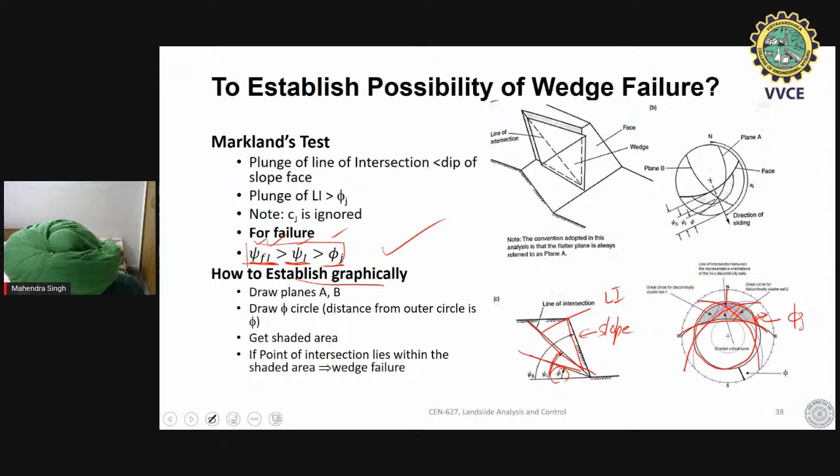We can establish this graphically also. Here this is the slope face, and we can draw a circle here which gives this value equal to the phi angle, the friction angle. And if the point of intersection is within this area, then there will be possibility of wedge failure. So this is the way we can establish whether there is any possibility of the wedge failure.

And when it comes to finding out the factor of safety, so this is the section. What we do is we consider the wedge, find out its weight, and also find out the reaction values on the different planes, because it is going to slide on these planes. Then using mechanics, you can find out the reactions, and from the reactions the frictional force which is going to develop, and then the factor of safety. I'm not going into the mathematics in detail because here I'm just touching the concepts.

So here this is the wedge which is trying to come down, and we can get the factor of safety, and there are some charts also available for simple cases. So this is the way we can do the analysis.

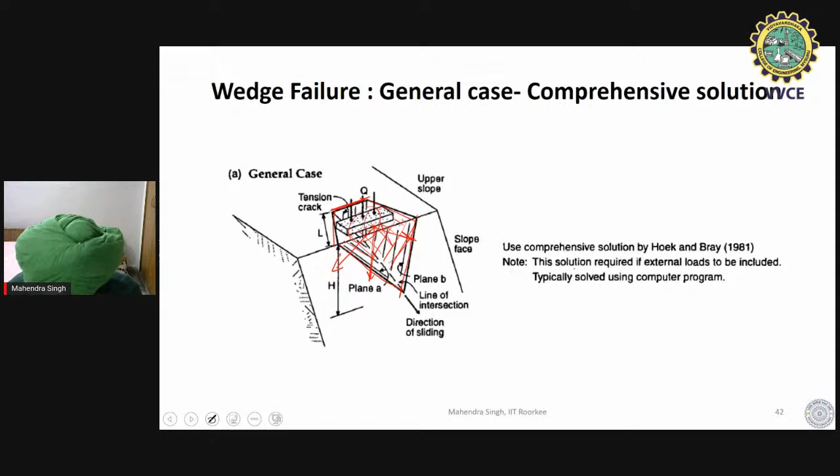So basic fundamentals are the same, that the weight will be acting in the downward direction. Then there will be some reaction on one plane, reaction on another plane, and then we will be getting those reactions and the frictional forces, and then we will be able to get the factor of safety. There are standard solutions also available in the literature which can be looked into. I'm not going in detail.

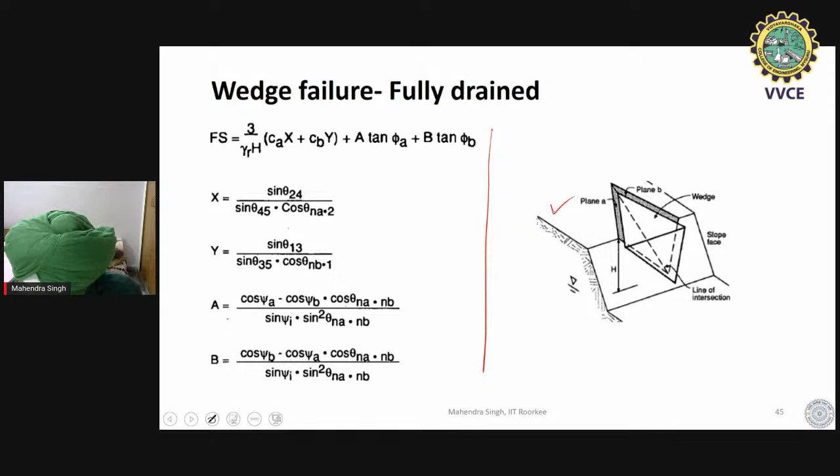So normally we use a combination of the stereographic projection plus these standard solutions. From the stereographic projections, you get different angles - angle between plane A and plane B, and how much angle the line of intersection is making, etc. Then these formulae and expressions are available in the literature, using which you can very easily get the factor of safety even without using computer programs.

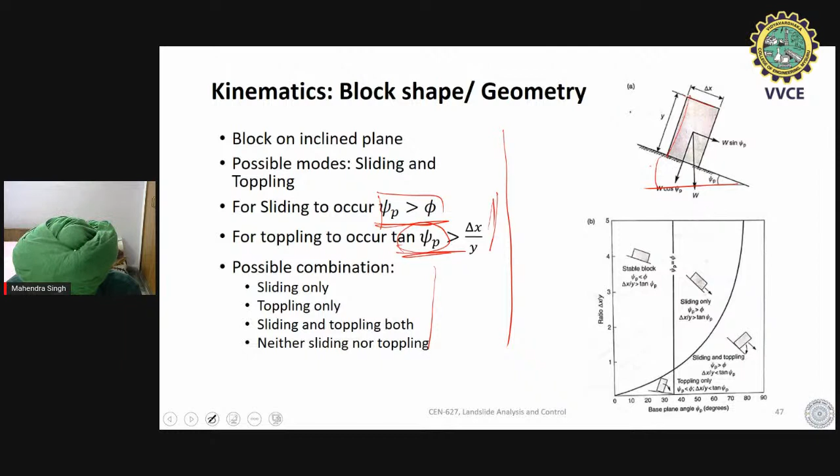So we take both of them and find out how much force it is applying on the next block. Then we go for the next block, and again we see how much force it is going to apply on the next, and so on, till we reach the last block. So this is the way we check whether the entire system is stable or not.

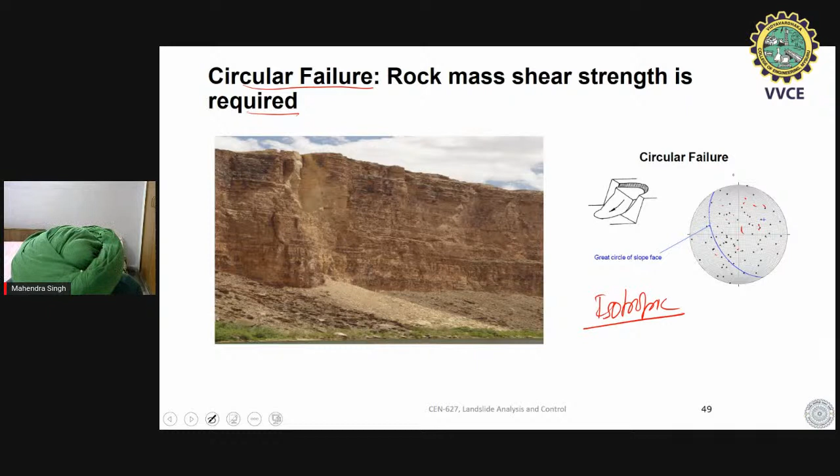And finally, this is the last failure mode, which is circular failure. Here, these are the poles of the joint, so there are a large number of joint sets. The material is isotropic, and we are assuming it is just like a soil - isotropic medium - and we use soil mechanics theories. This was the first part where I wanted you to appreciate that the mechanism of failure in rock slopes is quite different.

Now I come to the next part, the shear strength aspect. What is the shear strength? As I told you, there are two possibilities: one is when sliding is occurring on a joint plane, so the shear strength is required on that joint plane. Second, if it is a big mass with large number of fractures and the entire mass is failing, then we need rock mass shear strength. Both are required, and for that I'll touch upon a few simple models.

First I'm discussing discontinuity shear strength. Discontinuity means there is a joint plane, whether it is planar failure or wedge failure, and I want to know what is the shear strength along this joint plane. So far, we have been using a very simple model - simply take mu equal to 0.65 and use this. We can do that, but it's not so simple. This shear strength behavior is very complex.

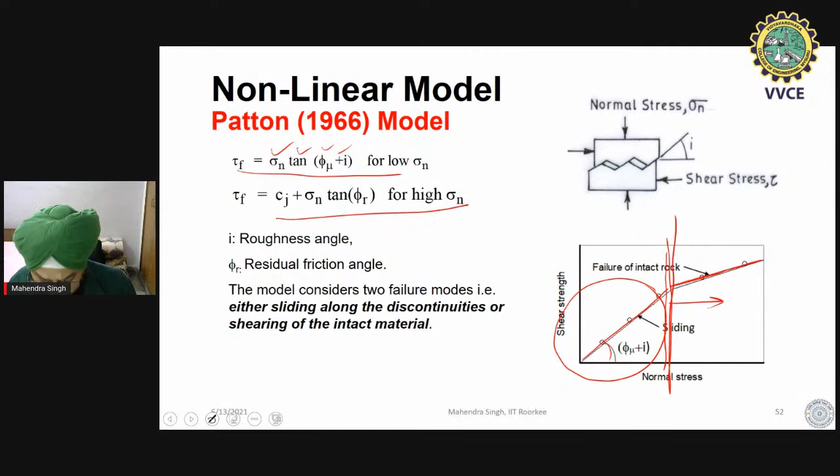So people have tried to develop non-linear models. One model is a bilinear model. You can fit this data from the test, and two equations can be used. One equation is for the low normal stress case, where tau is given by tau equals sigma n into tan of phi mu plus i. The second equation is for higher normal stress - when you are in that range, the second equation can be used. So this is one model.

Another model which is very important and easy to use, not complicated, is called Barton's model. Here the shear strength is represented as a nonlinear function: tau is equal to sigma n into tan of, let me call it phi equivalent, which is phi plus JRC into log of JCS upon sigma n. Don't go into the intricacies of this equation. JRC is a roughness coefficient for which charts are available, and JCS is the material strength at the joint wall, called joint wall compressive strength. So the strength of the rock also comes into the picture - if JCS is low, the shear strength will also be low, and if JCS is high, the strength will also be high. That depends on the ratio JCS upon sigma n. This model can be used for different sigma n values, giving a non-linear relationship that can be used in the analysis.

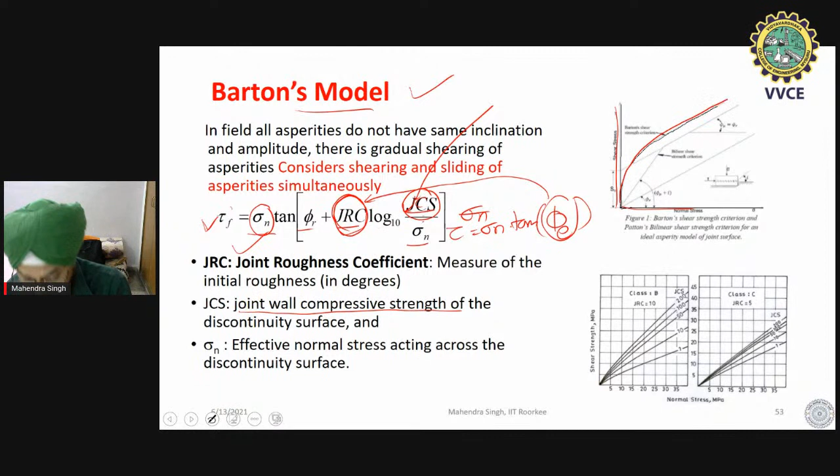Now coming to the next category of rock mass strength, where the entire mass is failing. So when the entire mass is failing, there are rock blocks that are rotating, sliding, and translating. It's a complex phenomena. For shear strength, we use the conventional Mohr-Coulomb equation in terms of tau and sigma: tau equal to C mass plus tan phi mass.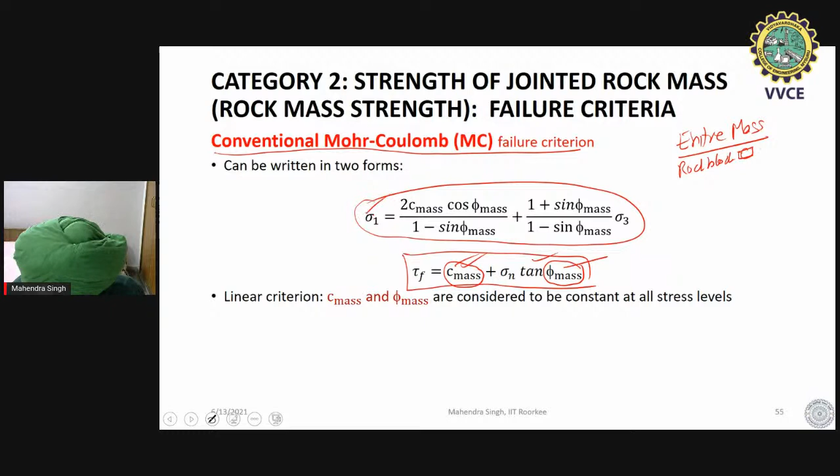I am purposely using these terms here. C mass and phi mass will be different from Cj and phi j. Or you can also use the equation in other terms, in terms of sigma 1 and sigma 3. For slopes, this equation will be used.

To get these C mass and phi mass values, a lot of research is going on, but the most popular methods are classification approaches, where you find the rock mass rating in the field depending on certain parameters, like UCS of the rock, rock quality designation, spacing of discontinuities, condition of joint discontinuities, groundwater condition, and orientation of discontinuities. This data you get in the field, and based on that, the RMR value is calculated, which you can then use for finding C and phi.

Similarly, there are other classification systems like the Q system you can use. The third approach is, like we do tests in the laboratory, you see, it is not possible to test rock mass in the laboratory, so we have to simulate those tests numerically using some equations. A lot of work has been done on this, in India and abroad, so we use those equations.

In the rock mass rating system, as I told you, there are 5 or 6 parameters to take. The parameters are the UCS of the rock; rock quality designation, which gives an idea about the fracturing of the rock—we take only those cores which are 10 centimeters or more and sum them up to find their percentage from the total core run, that is RQD; and spacing of the discontinuities, whether they are widely spaced or have very low spacing.

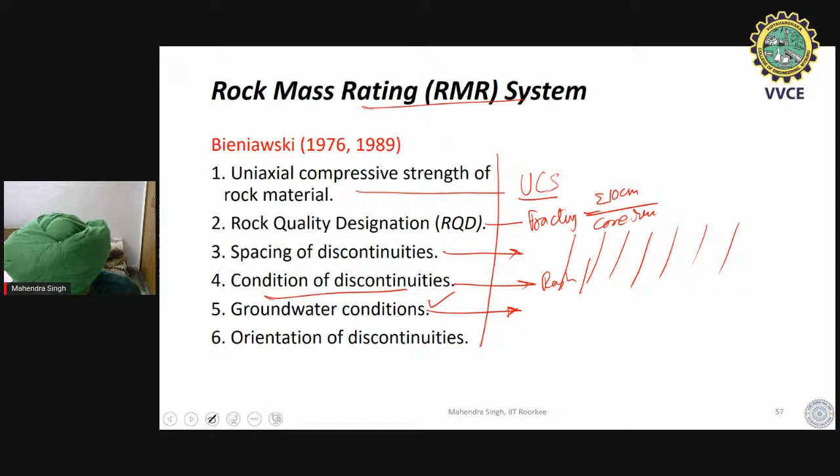And what is the condition of the discontinuities, whether they are rough joints or planar joints, and how much water is present. In fact, in these theories, water is also included into the classification approaches—groundwater condition, whether it is flowing water, and if water pressure is high or low. Based on that, and also the orientation of discontinuities, we find the RMR.

Then based on that RMR value, you can adopt the values of C and phi. These values are available from the original contributors, but in India a lot of work has been done with some modifications for Indian conditions, and we have found that the values from RMR were underestimated. So charts are available, and one can refer to those charts.

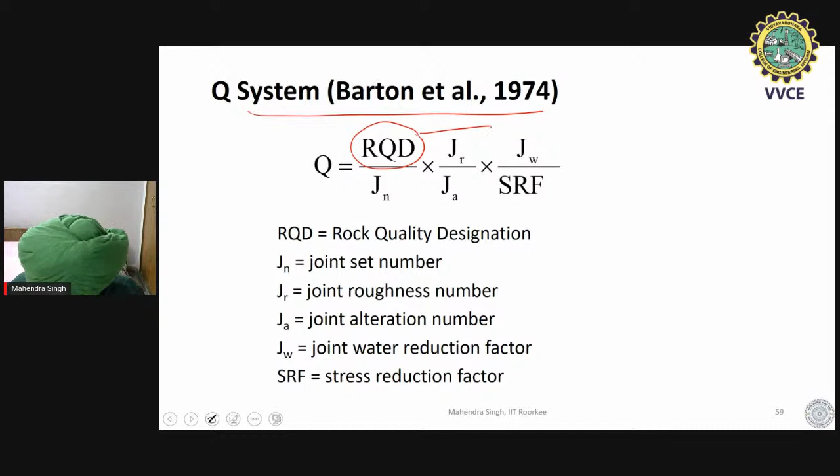The second classification system widely used is called the Q system. It uses RQD, which again indicates fracturing, how many joint sets are there, joint alteration, joint roughness—what is the roughness of the joint and how much alteration has taken place—how much water is present, and if there is some stress, the stress reduction factor has been used.

Then we calculate the Q value, and from Q also these expressions are available—I'm not going in detail of this. Then you can also use the nonlinear strength criteria for rock masses. Here there are a number of equations available, these equations are from Hoek and Brown, which you can simulate numerically.

You can find out what is the principal stress at failure for a given sigma 3. So you have to go to the field, and from the field you get what is called the geological strength index, and then you can correlate it with the parameters to get this equation.

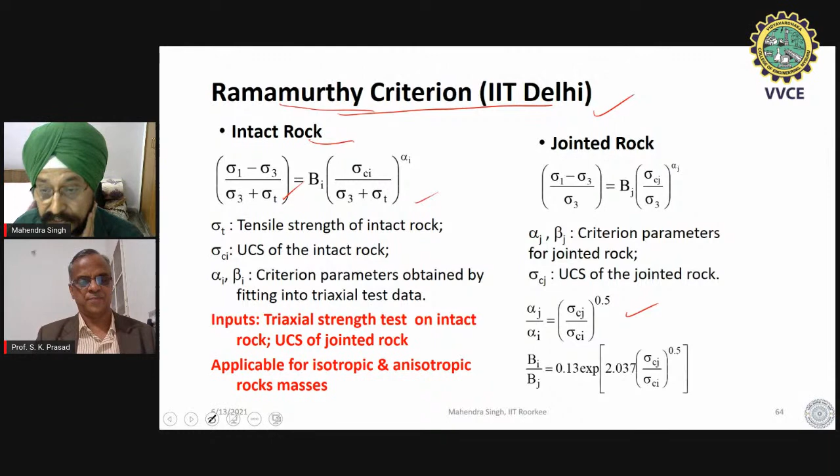Some theories have been developed in India also, and I wanted to highlight these. All those who are interested can go into these equations, which can also be used to simulate the shear strength behavior. Professor Ramamurthy at IIT Delhi has done a lot of work, and you can go into their work to find expressions that simulate the triaxial strength of the rock mass. We have also done some work at IIT Roorkee, which is available, so one can simulate the triaxial strength.

In these equations, you will need the rock mass strength, which is the rock mass strength at sigma 3 equal to 0. This is the starting point, so somewhere you would need those values also. The theories are available for this.

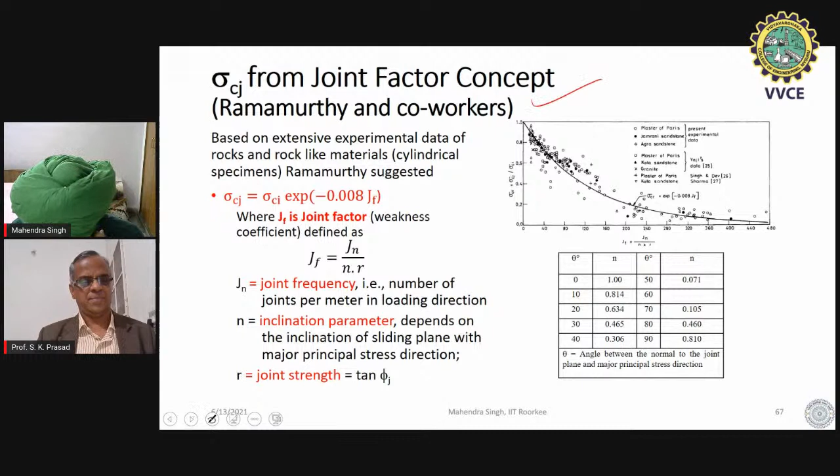Again, I am pointing out the work done at IIT Delhi. They have done a lot of work on these theories, and you can use the equations, or you can also use empirical equations available in terms of classification approaches. Several equations are available which can be used to find out the strength of the rock and then find out the behavior. Personally, we have also developed some expressions where you can do the test in the field and find out the deformability.

You can do the plate load test, and it is easy to conduct. Using that plate load test result, the deformability characteristic, and the intact rock characteristic, you can assess the strength of the jointed rock. We have used these equations at some projects where we did plate load tests and found the deformability of the mass. For example, we excavated a small drift, put a jack there, applied load, and found out how much is the deformability.

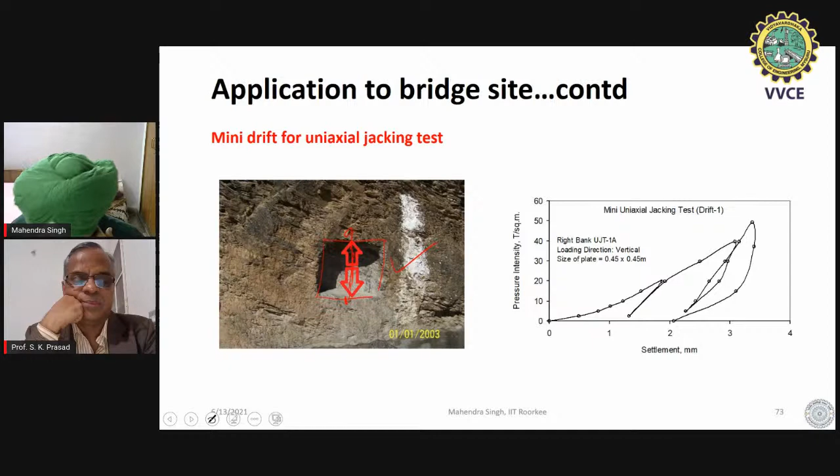And then from there we were able to estimate the shear strength parameters.

So finally, I will conclude this talk: landslides are very complex phenomena, and they involve soil and rock slopes. I have concentrated on the rock slopes here and am not going into much of the mathematics. There are simple failure modes which are possible, and the failure occurs because of the anisotropy induced due to these joint planes. So the failure can be a planar failure, a wedge failure, a toppling failure, or a circular failure.

Accordingly, what I want to emphasize is that you have to select a particular strength accordingly—it is not that I am going to use the same strength in any case. If the failure is taking place along a plane, you have to take the strength of the discontinuity. In that case, we suggest Barton's model, or if it is possible to test that joint plane in the lab, then you use those values.

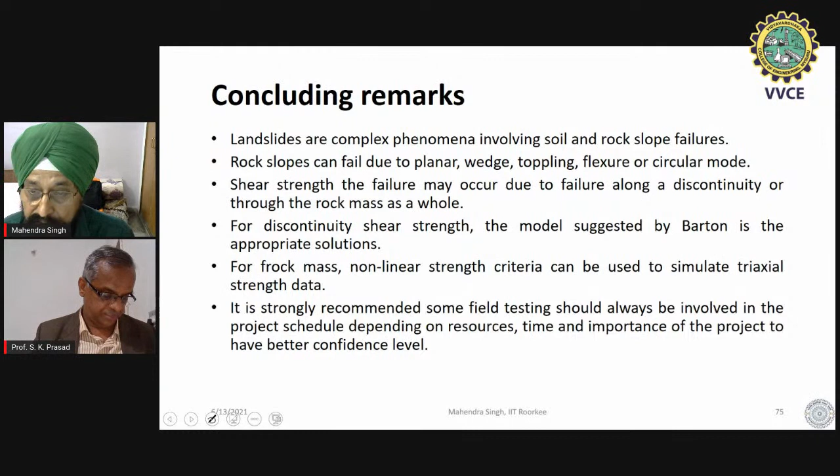If it is a big rock slope, and there is a possibility that the entire slope is failing with complex interaction of blocks rotating, sliding, and translating—so there is no failure on one single joint plane—then you have to use rock mass strength. There you can use the classification systems, and also use the strength criteria to find out the strength.

What I strongly recommend personally is that some field test should be there, and one such field test I have already discussed. You can conduct the plate load test, and from that you can get the deformability of the rock mass as a whole. That deformability is connected with the deformability of the intact rock—they are interconnected. If the rock mass is more deformable, it will have lower strength. We have found out those correlations, so you can connect deformability with strength and find out the strength of the rock mass.

So that is all I wanted to say, and I think I have overshot maybe 10-15 minutes. So thank you very much.

Thank you very much. Thank you. I'll be happy to interact with you. Sorry for the inconvenience in some of the slides we had. Absolutely no, sir. Thank you very much. Okay.

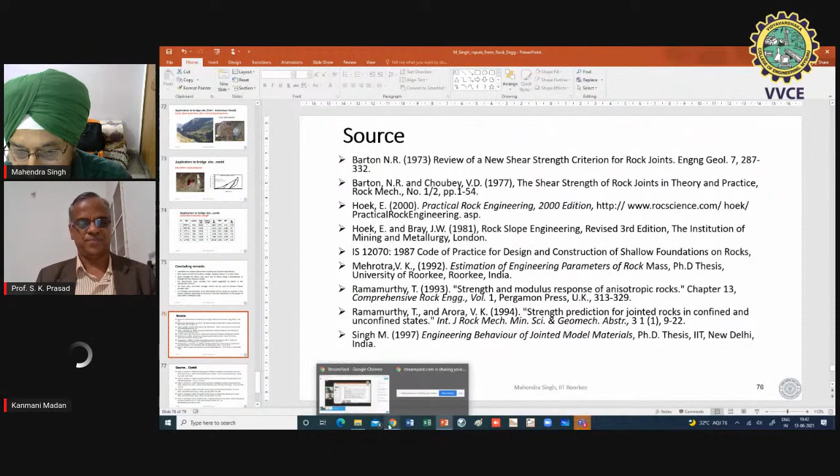That was indeed an informative session wherein we realized the importance of rock mechanics, understanding the failure patterns, stereographic projection of planes, plotting of poles, kinematic analysis, stability analysis, and how to establish possibility of failure and shear strength aspects through different modes. We learned about rock mass strength.

I have tried to complete the entire syllabus in one hour. We learned about rock mass strength and its failure criteria too. We got introduced to new topics, and many of us felt that rock mechanics is so interesting and we have to move towards the topic and learn more about it.

Thanks a lot, sir. It was indeed a very good presentation. Thank you, sir.

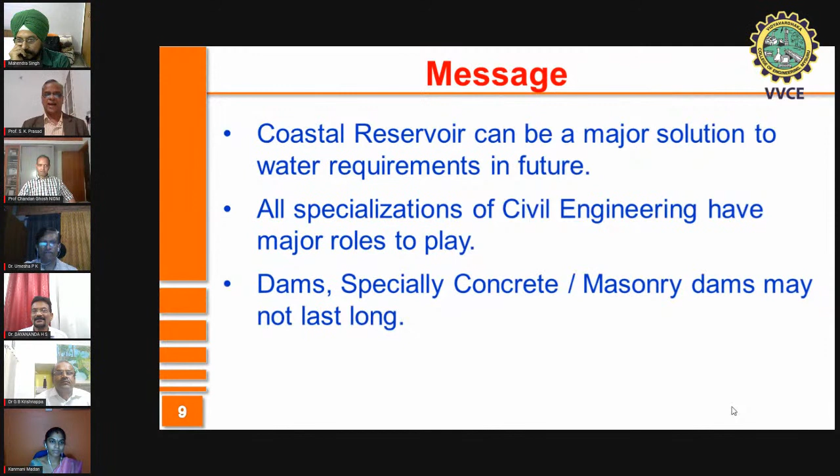He said coastal reservoirs can be a major solution in future, and dams, whatever we have, are only catering to about 10% of requirements and may not last long. Interestingly, he mentioned that concrete or masonry dams are weaker than earthen dams, and the order of the day in future would be the coastal reservoir solution.

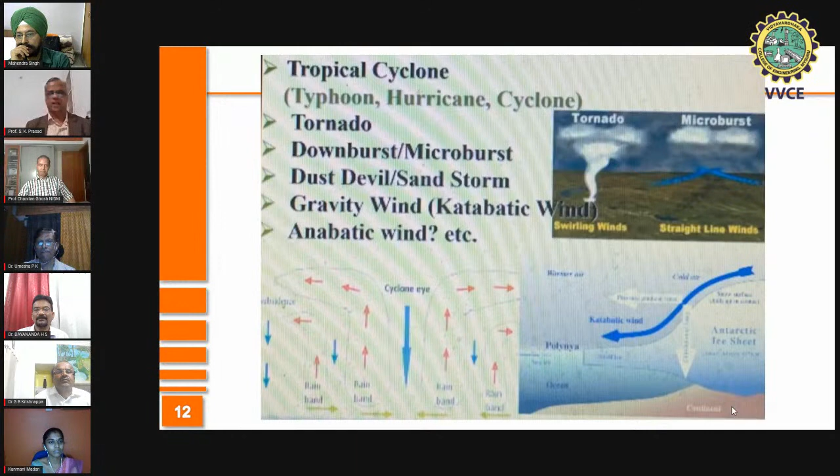Then we had an excellent lecture by Dr. Selvi Rajan S, Advisor, Nexus IITM Research Park. She spoke about research priorities in the field of wind engineering to restore a resilient future, giving a wonderful lecture covering all kinds of problems related to wind—whether tornado, hurricane, typhoon, cyclone—and several other things.

And then finally she tried to give a message that wind related forces can be very dangerous, especially to tall structures, which has to be taken care of. She also mentioned that we can learn a lot from nature, especially many birds, like kingfisher and condor, to understand how our structures should be designed to resist wind.

Then we had two sessions yesterday. The first session was by Dr. P. Vedagiri, Professor at IIT Bombay. He spoke about proactive traffic safety evaluation using surrogate safety measures. Some people ask, how can this be a disaster? But looking at the kind of casualties we have, almost on average 1.5 lakh people in India are killed because of traffic accidents.

He very clearly mentioned that safety, speed, comfort, convenience, economy, environmental compatibility are all factors to be considered when you look at transport infrastructure, and safety should get the highest priority. He identified many risks like speeding, lack of restraint system, lack of helmet use, drunken driving, use of mobile phone while driving, and roadside objects as risk factors that create problems.

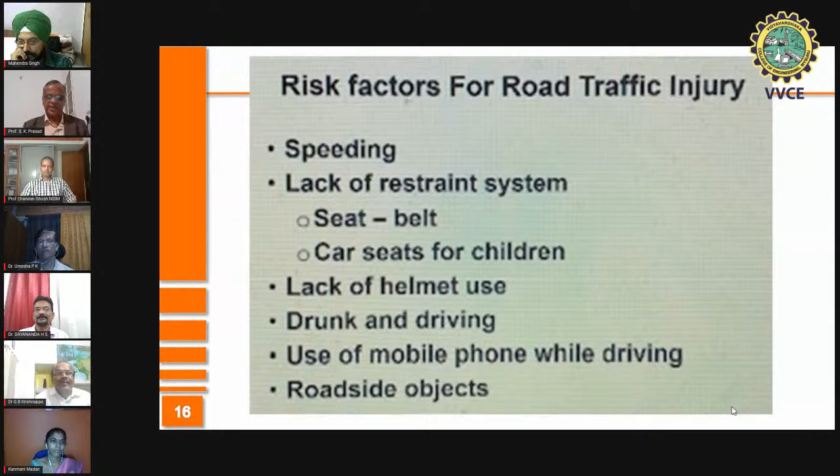Finally, he gave a wonderful message mentioning the 2 second rule, a 2 second difference between vehicles. If you can manage this as a road safety auditor, you will help save many accidents. Also, many blind spots exist, especially with heavy vehicles, and pedestrians or other road users should know exactly where those blind spots are.

He clearly tried to mention that speed can be very dangerous. You have to balance between speed and severity. In case you go in for speed, there is every possibility of serious problems.

After that, our own Chandan Ghosh, who has been there throughout these 3 days, gave a lecture on IoT devices for disaster management. He covered various aspects of disaster management and disaster resilience, not only natural disasters but also COVID. He said that disasters cannot be controlled only by the government.

Every one of us has to chip in. He very nicely commented on all aspects of high resilience, and mentioned that we can use simple mobile phones for many aspects of disaster management. He gave a message that disaster management and disaster resilience require everyone to show belongingness and work together. IoT can be a very useful tool to solve problems of disaster management. Shift from analog to digital, mobile phones, AI, ML, health monitoring, and wireless devices are all part of the future of disaster resilience.

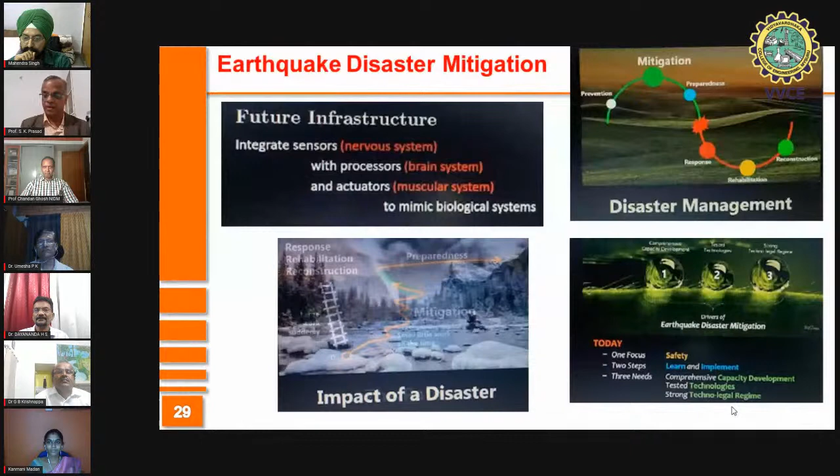His emphasis was on creating awareness at all levels. He finally mentioned that earthquake resistant design is a multi-hazard design, a closed loop design method. Earthquake is not a force; it should be considered from the displacement point of view.

New design methods should be emphasized. At present we have force-based design, displacement-based design, and maybe in future energy-based design. He mentioned that we need to use the correct level of technology, and that repair is not retrofitting. He actually tried to say that awareness is very, very important, and this is what is to be created at all levels.

Finally, we had the lecture from Professor Mahendra Singh. As he rightly said, we have been very affectionate friends since the days we were at IIT Kanpur doing our masters together. And he spoke about landslide mitigation very clearly.

This is a subject which somehow is not clearly taught in the undergraduate level, but we know how important it is, whether it is Himalayas or the Western Ghats, and the kind of knowledge he gave on how to understand the mechanism of failure, modes of failure, were simply fantastic. So I really congratulate and thank him for giving us more interest in this area. And he very clearly mentioned that rocks can be more dangerous than soils, and we have to take extra care about that. Well, I'm extremely happy to mention that all these were, I would say, history.